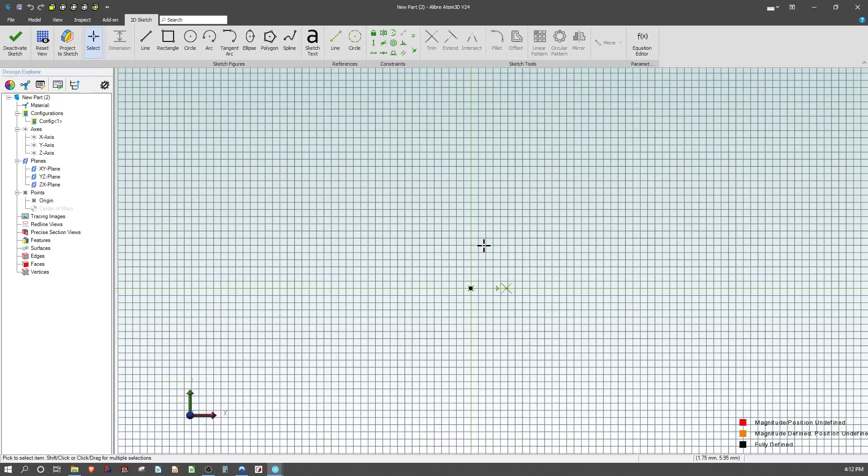Anytime that we start modeling, we want to start with sketches. Let's go into how about the XY plane? I'll just click on my XY plane so that it's highlighted in blue. And I'm going to click on Activate 2D Sketch over here. Now, when we sketch, it is very important and fundamental to Alibre to be able to sketch well. To any parametric CAD modeling platform, you want to be able to have good sketching skills because that's how we make our solid models. Sketching is not the end product of parametric modeling, it's just a means to the end.

So for example, how about I make a rectangle? This is not a very good sketch as it is, right? I just made a random rectangle. But let's look at what we can do with the sketch to turn it into something that's useful to us. So I've made a rectangle, which we'll talk about how to make much better in a few minutes. And when I deactivate my sketch, there's a few tools that I have to make my rectangle into a solid model. The first one is Extrude. I click on the Extrude button, and you can see I get a little preview, and this menu pops up. And I can extrude it, say, 10 millimeters. And when I say OK, our sketch turns into a solid, right?

Now, over here in my tree to the left, I have my sketch in my tree, and I have my extrusion that I've made. And you can see that the sketch is kind of indented under the extrusion as the sketch is part of the extrusion that I've made, right? And so I can go back and change the way that my sketch looks. And as I deactivate my sketch, the part or the solid that I've created updates because I've updated my sketch. So I've got this little history of how I've made things over here on my left. And I can go ahead and delete the extrusion, and you can see my sketch remains.

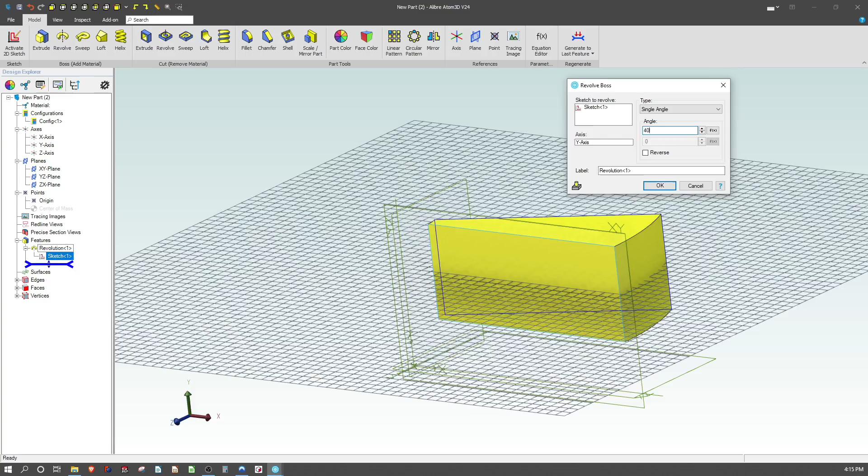I can go 40 or more degrees. So when we work with Alibre, we have these certain tools to change sketches into solids. And that's our goal as we begin to work with sketches, right? There are means to generate solids from.

Now, not only do we have extrude and revolve, which we've seen examples of, but we have sweep, loft, helix, and then we have a bunch of subtractive features and a bunch of ways to edit our solid. So, as we begin turning our sketches into solids, we want to get good at sketches to begin with, because then we can make excellent solids.

So I'm going to delete my elements in my history tree, right? And I'll choose my XY plane once more. And I'm going to choose to activate my 2D sketch. So first off, what tools do we have in the sketching environment? We're going to have

the line tool, right? And I can just keep on clicking to make new lines that are all connected to one another. And I can make a weird shape if I wish. And I can highlight everything and hit the delete key to get rid of what I just sketched. So the idea is with the line tool, we make lines. With the rectangle tool, which we've seen already, we can make different rectangles. With the circle tool, right, I can make circles. This is pretty straightforward.

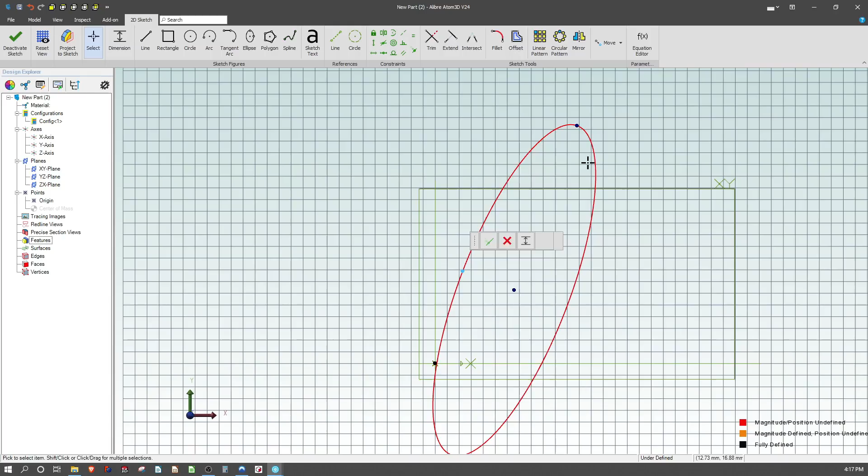Ellipse is pretty cool. I click one point to center my ellipse. I click one point to find the end of my ellipse, and then I click on a third point to choose how eccentric I want my ellipse to be. And from here I have 2 points, a point there and a point up here, and that gives me a nice little method to dimension things with my ellipse.

Next, I have a polygon, and when I select my polygon tool, I can choose either this profile or this profile. You can have the same kind of polygon with both. There are just different ways to define it. Do I want my circle to be on the insides of my lines or on my corners? This might be nice for beginners, so I'll choose this. I'll choose 6 sides, and there I can make a polygon, or what Tim Allen on Home Improvement liked to call a 6-sidagon.

I can make this as small as 3 sides and draw a triangle, and I click apply, right? So we can make different polygons that are really nice. Now you can argue that you can make 6 lines into a polygon, and you'd be right. You could make this without the polygon tool. This is just a way to save time.

Next I have a spline. This can be a little bit intimidating for people, especially people who wish to define their sketches, which we'll get into. But a spline allows us to generate smooth, organic shapes that would be hard to make with the other tools that I've just shown. So those are the main sketching tools that we have to work with.

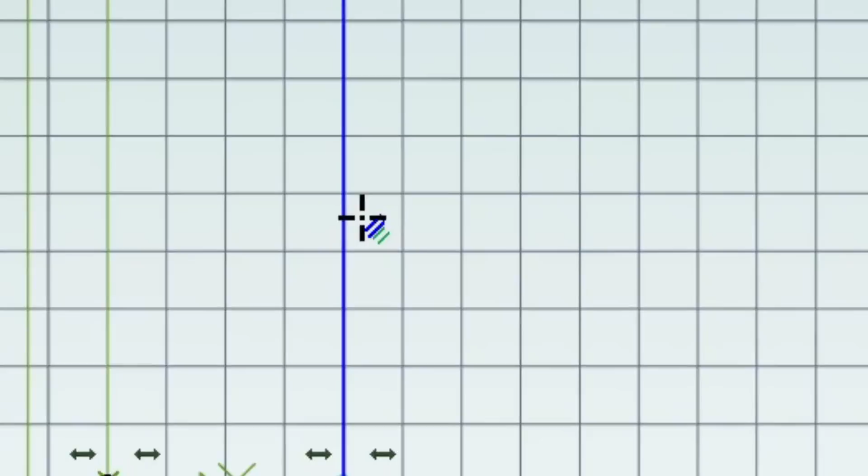So what kind of constraint tools do we have? Well, you can see that there are some of these little gray guys that are showing up already. These are known as auto constraints. So if I draw a line that is vertical, you can see that I have this blue auto constraint that shows up. And I have a blue auto constraint on this other line over here.

That's no accident. That means that should I click to create the line, it will automatically be held parallel to the other line that has the blue symbol showing up to it. So that is known as the parallel auto constraint.

Now if I move this line horizontal, I have this little right angle looking square thing. That is the perpendicular constraint, right? So perpendicular means that it will be held at 90 degrees to that line all the time. Likewise, if I move it at this angle, you can see that Alibre knows that the parallel constraint shows up if I move it parallel to a line that already exists in the sketch.

So if I define this line and hit the Escape key to exit my line tool, now however I manipulate the sketch, it will keep these lines parallel. Very, very handy. So sometimes you have these constraints that show up automatically to help us save some time and effort when we go to sketch. So I have auto constraints, and we've covered what parallel looks like.

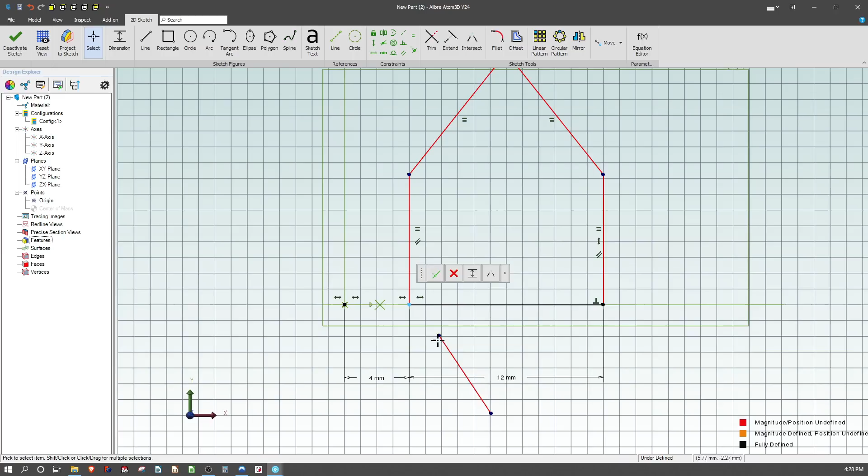That's coincident. Likewise, let's say that I've drawn a line and I want to fix this endpoint onto this endpoint. I can choose coincident and choose here and here, right? And now, no matter how I manipulate my sketch, I will always have these lines be coincident.

The key thing is I always hit the escape key after using my constraints. So I make a line, right? I add a constraint of some kind, and then I hit the escape key to get out of that tool. Otherwise, Alibre will think I'm still wanting to continue to add constraints using that same tool. All right.

So how about we fully define this? I get into my dimension, right? I choose my dimension tool. I'll add a vertical dimension to give my wall a height of, say, how about 10 millimeters? What if I want to choose an angle on my roof, right? What if I want my roof to be like 45 degrees?

Well, if I click one line and another line with my dimension tool, I can choose a degree angle of, say, 45 degrees. And now if you notice, my whole sketch is black. That's our goal, to fully define every part of our sketch. It should be black. So we're all done when the sketch is black.

Now, I've shown how to do an angle with a dimension, and I've shown how to work with the lines. But what if I get a little bit more complicated, right? What if I delete both of my lines, what if I want to have a smooth curve that goes along the top of my roof?

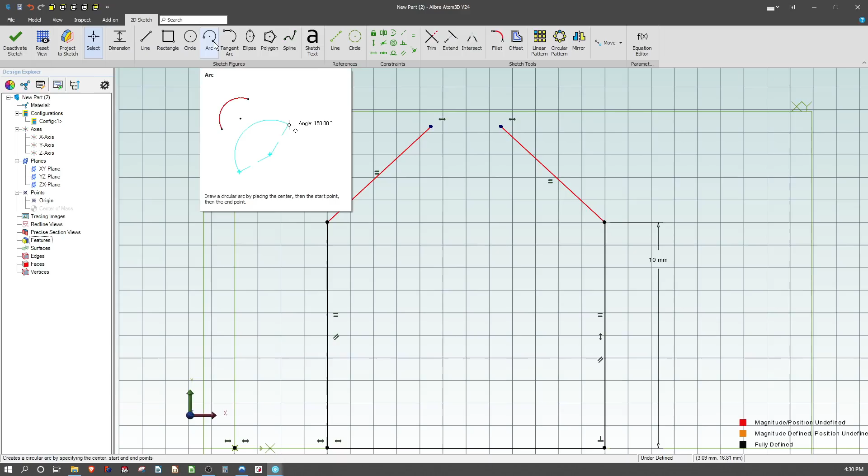Now I've shown how to make a 3-point arc. Right? I choose a center for my arc, and I choose some lines, right? And I can just sketch an arc out that way, as you've seen. But maybe this is a good time to show the tangent arc, right? So I choose my tangent arc, select a point, and then I choose the second point. Now you'll see as I manipulate my arc that I remain what's known as tangent.

Tangent is a nice feature because if I draw an arc like this, you can see that there's an abrupt transition between my line and my arc. So if I hold Shift and I select both my line and my arc, I can change that to be a smooth transition by choosing tangent constraint. I choose a tangent constraint, and then Alibre makes sure that my arc smoothly transitions into my line without any sharp edges. Likewise, I can choose coincident to fix the end of my arc onto my line.

And I think by the way that my geometry is worked out, I don't need to worry about adding a tangent on this side. In fact, if I try to add a tangent on this side, I get what's known as a constraint cannot be applied since it results in an over-constrained or inconsistent sketch. If you come across this error, it means that you have more than one thing telling the sketch how to be.

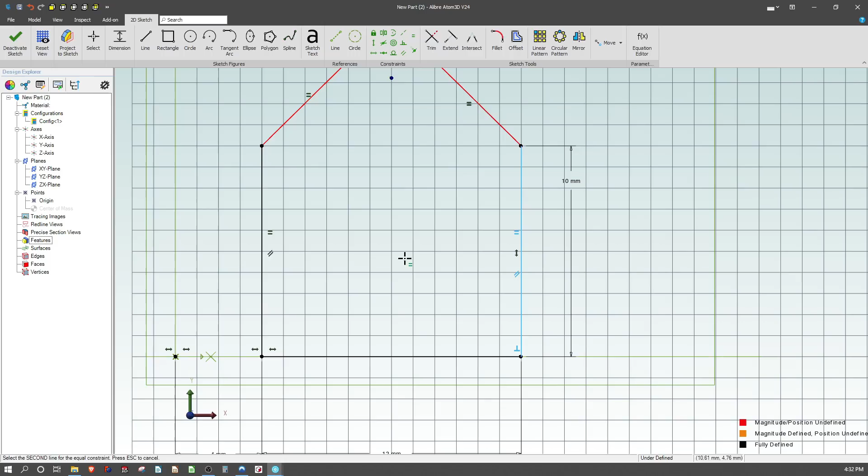So in other words, if I try to say that this line right here is 10 millimeters and this line right down here is 12 millimeters, and I go into my equal tool and I tell my lines to be equal, then it says, oh, it's over-constrained, meaning this has to be 12 and this has to be 10, which means that they cannot be equal to each other, right? I have multiple settings that are conflicting with one another.

So as we go about in Sketch, it's important to remember that we want to do so in a way that it doesn't over-constrain anything. We give one definition to everything. And if that's overwhelming, just think that that will automatically pop up if you try to over-constrain. So it's not something you have to worry about.

Okay, so we've done this. Now let's say I want to add in a circle for some reason. There are some constraint tools that I would like to cover that cover how to work with circles. One of my favorites is concentric. So concentric means that two circular things will share the same center.

Here I've got a little dot that shows the center of my circle, and here I've got a little point that shows the center of my arc. And if I choose concentric on both of these, it forces them to share the same center, which really is actually kind of cool. Maybe I'll leave my circle there.

Next one, this is a coradial constraint, which is a lot like concentric. So if I draw an arc, right, coradial just means that these arcs will share the same radius if I apply that tool. So I'll choose coradial up here. And now that means that they share the same center, like concentric, and the same radius. Also, just by hovering over this, you have a pretty good explanation.

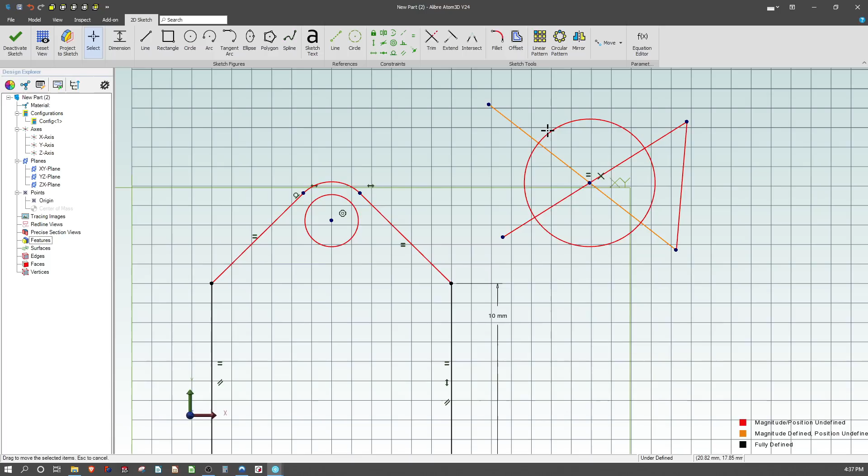Well, I choose my intersection constraint, highlight the center of my circle, and highlight where the two lines intersect. There we go. And now my circle is held at the intersection of these lines. And as I manipulate these lines, you can see the circle stays intersecting. So that is the intersection constraint. It's not used as often by me.

So we've got perpendicular, parallel, I think we've covered equal, basically all of them. Symmetric is a little bit more advanced, but it can be a lot of fun. Let's say that I have a circle and another circle, and I want them to be symmetric about this line. I'll choose the symmetric constraint, and I'll choose the line of symmetry, here this line, and I can choose one circle and another circle,

and then I'll hit the escape key, and I've made it so that these circles, no matter how I manipulate them, are symmetric about that line. So that's really handy if you want things to be symmetric and constrained in a way that they're predictable about a certain line.

I think that is, midpoint constraint, right? So let's say that I have this line and I want this point to line up right at the dead middle of this other line. Well, I can choose the midpoint constraint and choose my line and choose my point, and it automatically knows that this line should be in the dead center of this other line. So no matter how I manipulate it, it will always end up as being dead center. So those are all of the constraints and relations that we've gone through, all of them that are available.

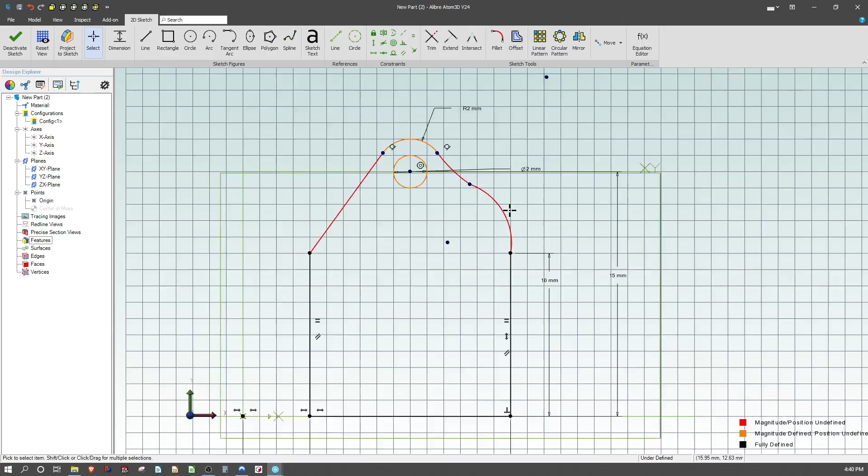So if I want these to be tangent, I could have just drawn a tangent arc, but if I have two arcs that are not tangent, I can use this tangent tool to make them tangent to each other. Likewise, I can make this arc tangent to the line. And now I've got a kind of a wavy roof that has smooth transitions all throughout.

Likewise, maybe I can delete this and do the same thing over here. Tangent arc and a tangent arc. Now I want my roof to be symmetric, and there's a lot of ways to make it symmetric. So with CAD, it's less about what is a way that I can do it, but it's really choosing the right way to do it. And because you're the engineer, you get to decide based on your design intent what the right way is.

So I can make this symmetric in many ways, but for the purposes of this demonstration, so I can introduce some new tools, let's talk about these dotted lines and circles, right? If I choose this dotted line, and I come over here, and you can see as I highlight this, there's a little dot that shows up in the middle of my line that highlights the exact center. So if I click on that little midpoint, then I know that I have the exact center of my line. Well, now I can make this vertical, right? I can make this dotted line vertical, and that forces the circle to be in the exact center of my house.

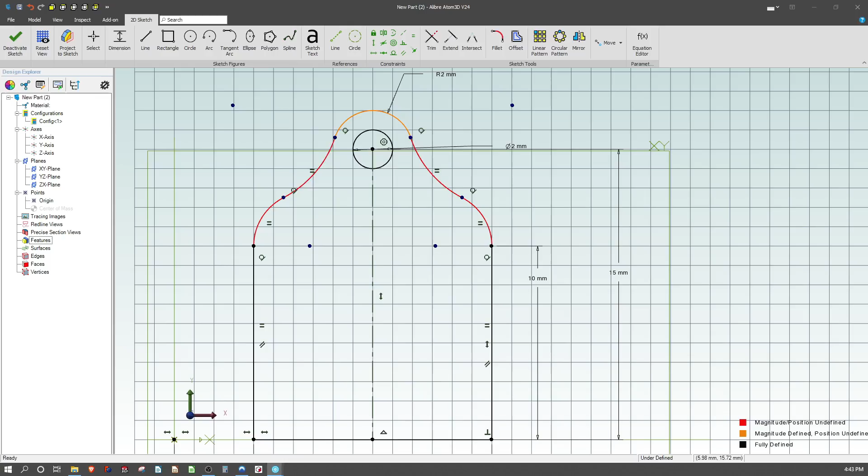Likewise, I can click and drag again. I can say, oh, you know what? I don't have a full radius on these lines, so I can choose my dimension tool, click on my arc, and I can set a radius of, say, 6 millimeters. And what if I want these to have a radius of 6 millimeters down here? Well, then I can choose equal and give them both a radius of 6 millimeters, and that fully defines my sketch. Everything is black.

So a nice troubleshooting tool is to say, I can click and drag things, and in the ways that they are free to drag, I can use dimensions and constraints to stop them from being free to drag, right? So let's deactivate the sketch now. I just click deactivate sketch, and I can extrude this, and just as before, it extrudes my shape. And because I have my hole, I know that it's going to not extrude where I drew my hole.

Likewise, I can get back into my sketch by right-clicking it in the tree and saying Edit. And I can add anything else, right? I can add a little ellipse into this shape. But I'll move this ellipse down a little bit so that I don't interfere with my hole. If I deactivate my sketch, there's my ellipse. Now, of course, my problem with doing that is I just drew an ellipse without defining it. It is best practice to make sure that my ellipse is black.

So I can add, say, a dimension here on that little handle it gives me. I can add a dimension here on the handle it gives me. And now I'm fully defined. We'll deactivate. And there's my house shape, which I think is pretty cool. So that is how to sketch.

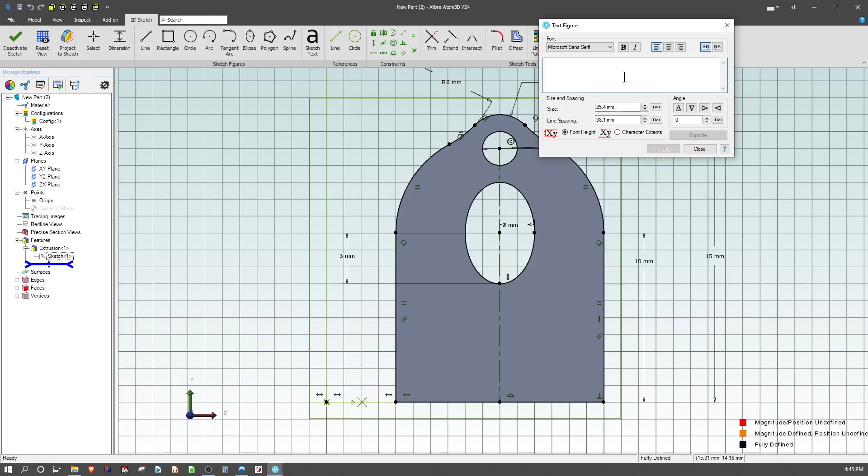So we've covered using the dimension, the line, the rectangle, the circle, the arc, the tangent arc, the ellipse, the polygon, a little bit of the spline. We can also add text to our sketch, right? If I type out HOUSE here in all caps, you can see that my text is quite large. So I can highlight my text and make it something like 10 millimeters, a little bit more manageable, but it should be smaller still.

So if I accidentally hit escape, as I've just done on purpose here, I can always double click on my text and it brings up my editor again. Maybe I want to make this 1 millimeter, right? And then I can position my text with my little center handle, and I can define it how I want to. Let's choose coincident up here. And I can choose my little handle. And it tells me that I've already made the coincident constraint, so that's good.

What if I try to dimension something from end to end? That will tell me that I'm already dimensioned, so I can only select a dimension that will have parentheses around it. What does that mean? That means that it is a measurement that is not telling the sketch what position it has to be in, but rather telling me what the measurement is without defining anything. In other words, if this didn't have parentheses, it would be trying to tell the sketch that it needs to be 4.584 millimeters wide, but we already have other settings that determine how wide the sketch is. So it is what's called a driven dimension.

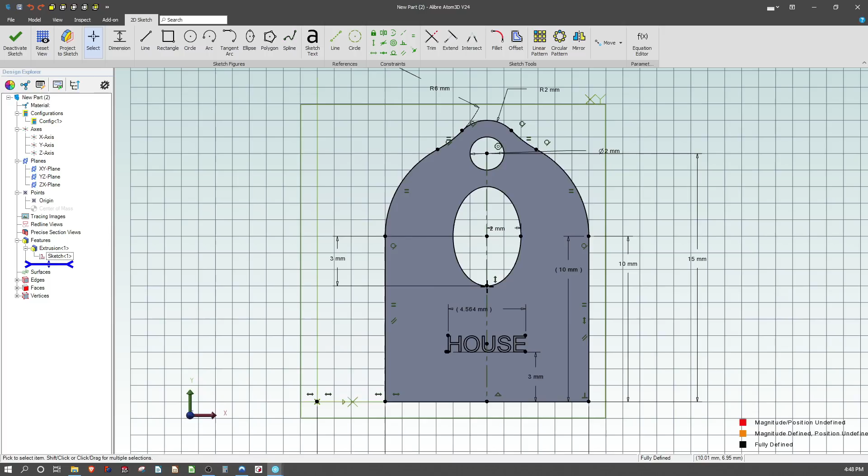It takes a lot of practice to be able to sketch well. So please don't be discouraged if it takes a little bit of work to figure a sketch out. So as I deactivate the sketch, you may be asking yourself, how come I'm not having the house figure show up? It's because I have text within a closed figure. I did this on purpose to show, in case you run into this too. Having text within a closed figure can be complicated. So if it doesn't work, we're just going to take our text out, and we can add the text in a secondary operation.

We're sketching on the XY plane. What if I chose my XY plane and chose Activate Sketch again? Now, let me take my text. I'm going to say HOUSE. Maybe we can make this 5 millimeters. We'll say apply, and then I'll double click on my text. Okay, like 5. That's still big, isn't it? 1 millimeter. Okay.

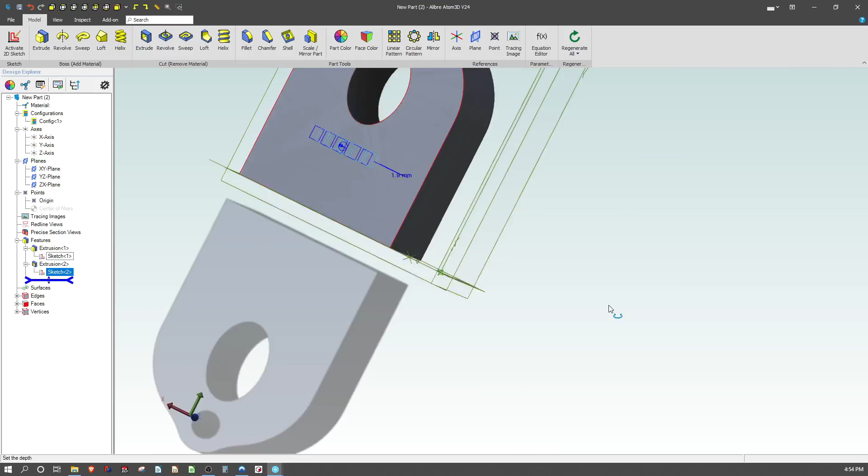So take my house text, and I should fully constrain it. I'm just going to give it a few random dimensions of like 10, and then give this a vertical dimension of, say, 5. And I deactivate my sketch. Now I still have my text. It's not showing up for graphics reasons, but I can cut my text by choosing this extrude. Not this extrude over here, but this extrude that's made to remove material.

And I can move my text into a depth by dragging this arrow, or likewise in the menu that pops up over here, I can specify something like 2 millimeters. And then I've got a 2 millimeter deep house, what we think of as a pocket or an extruded cut. So this extrude adds material. This extrude over here takes material away. And you'll see that theme through a lot of these tools.

So if I try to say I want to cut through all, I certainly can do it. And CAD is very forgiving. But you'll notice I've got this little body that's floating in the middle here that's not connected to anything, right? So if I take my view and I look at it straight on, this little O center is just floating in space. So it might look right, but a few considerations to think about with CAD and how realistic you actually want it to be.

So I've got my house over here. Things are looking good. How about I save this part off as like a little sample part, and I can put it into GrabCAD. So if we want to save something, we say File, and we can say Save or Save As. I can always take this window down, even close it after I save, and we'll create a new part.

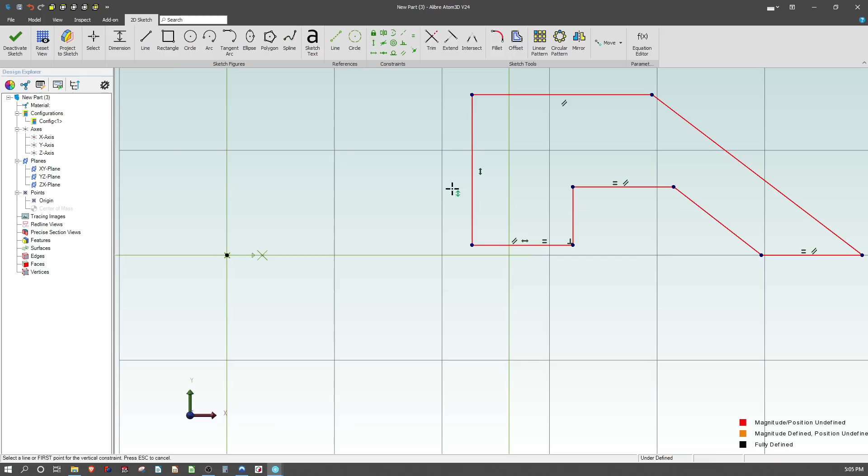Now, how else do we want to constrain this? Let's say we'll go with a horizontal from this point to this point. And then let's give it a horizontal from the origin over to this point, right? And maybe I'll give this a dimension. Whoops. A dimension of, oh, this one is in inches, of course, because I think that's what I'm defaulting to. 1.5 inches, how about? Give this a dimension of 1 inch.

I think I'd probably want these lines to be parallel. So I choose my parallel tool and click both of these lines. And then I'll choose equal, and maybe I'll make these two lines equal at 1 inch. But the constraint already exists, of course. All right, maybe I can add an equal from here to here. You know what? I don't like that. Control Z, the easiest way to get rid of equal. Let's come over here and maybe make this 0.5, right? Something smaller. Maybe I'll give this an angle of like 45 degrees.

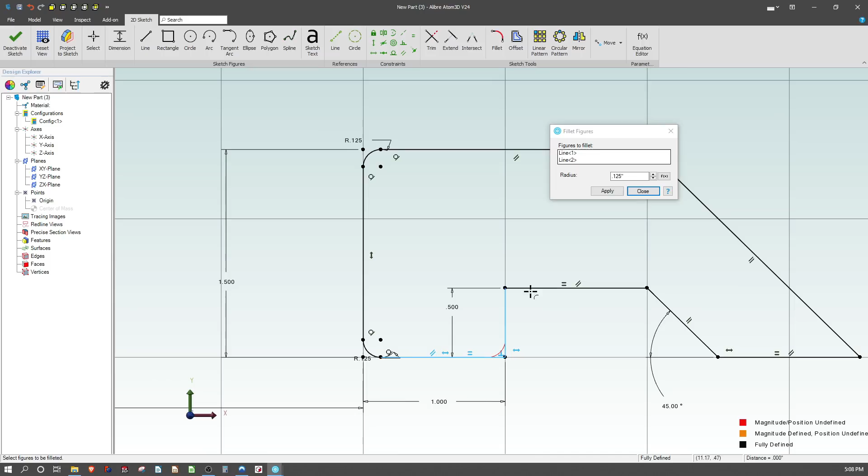That's a nice feature so that I don't have to worry about adding a fillet after the fact. I can choose this line, and I get another nice little fillet, right? So I can make every edge, if I wish, have this fillet and do so way more quickly than trying to sketch out all the different little arcs that I have to sketch out.

Now you'll notice on that last one, I did the fillet, and all of a sudden I've got red and oranges, and I can click and drag and verify that, yeah, something happened. So I'm going to hit Control Z, and usually what happens is when I add in my fillet, and that happens, I lose some kind of constraint or relation, and usually something related to the fillet that I've added. And if that happens, that's okay because I can reconstrain.

The question is, what did I lose and why? I go from here to here, and I add my fillet. Yeah, there's some kind of dimension that I'm losing. I think it's probably an equal somewhere. Regardless, I can use a dimension or another constraint and simply reconstrain everything.

3.5 is what it was. Looks like a great dimension. So that is the basics of using the fillet command. And there again, so that happens sometimes. And I think that happens in most, if not all, platforms.

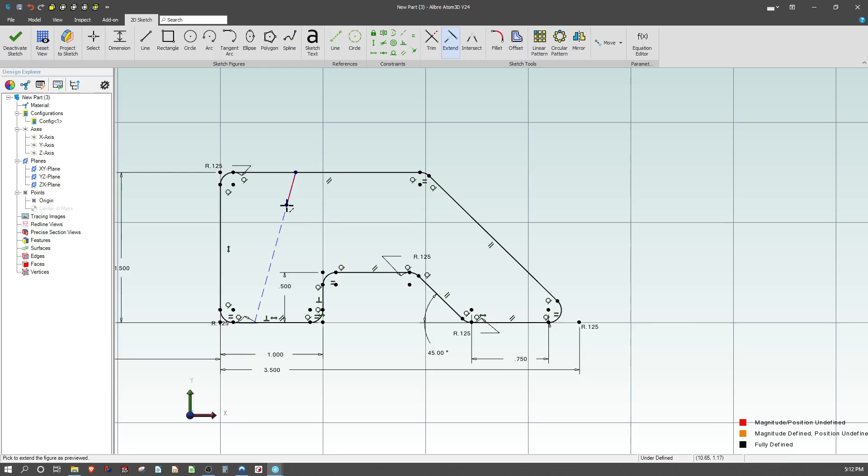All right, excellent. Finally, extend is kind of the same thing. It's kind of an easy add, almost coincident-like thing. If I choose extend and I choose my little point, I can choose a point that I want it to extend to. And these things automatically extend to the next points. And again, they're held coincident, right? So a nice little time saver right there.

Finally, you can do that with 2 lines if you wish, right? These are just little time savers. You can do the same thing with these constraints if you wish, but we can just choose 2 lines and have them intersect together and be held coincident at their endpoints. So those are some additional tools now that we've had a little bit more practice with sketching.

Okay, let's do a revolve to finish up our mechanical ring. We'll deactivate our sketch and we'll choose the revolve command. We'll select our axis. I can choose it from the graphics display here. And there's the preview for my ring. I will say OK to make it so. So that will be our revolve now.

Now that I have this ring, let's go over a few other things that are going to be just useful. I'm going to go into my tree, find my sketch. I'm going to right click and edit my sketch. Maybe I want to offset my sketch. As I edit my sketch, I'll choose offset. And I can offset all of these points. Now I'm going to go kind of thin. Let's go with 0.05 or something like that.

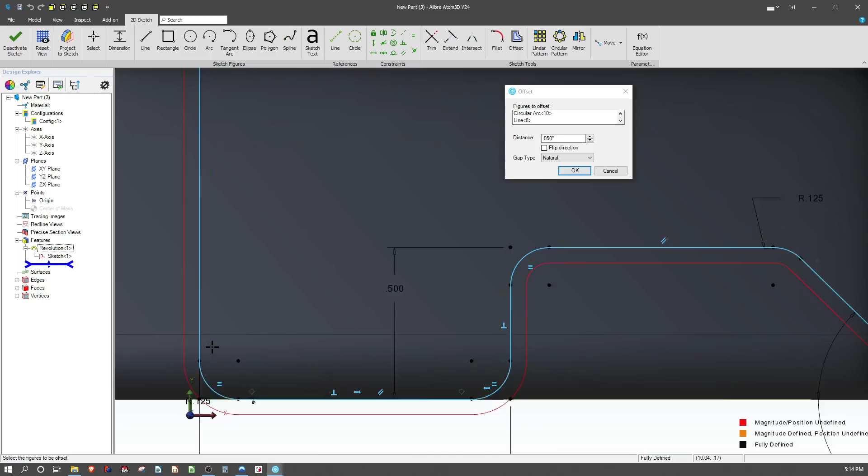And then I'll continue to select these parts. And I don't have to go all the way around if I don't want to, right? But offset lets me simply choose sketch entities that are a specified distance away from what you've already sketched. So I can make this 0.05, or I can continue to offset higher and higher.

Now as you offset, you'll see that my fillets right here, they get so big that they have to collapse into nothing. So good on Alibre for being able to deal with those fillets effectively, right? But here I have an offset that I still have to add my constraints and relations to, right? They're not constrained in any way. But I can offset this if I wish, which is a great tool to have.

Likewise, I just clicked them one by one to show you how it goes, but I can highlight all this and choose my offset. 0.05 was actually pretty good. You can see that we've been able to offset it pretty well. So let me fully constrain this.

And if you haven't had a chance already, I'm going to fast forward this to not waste time, because it really is going to take a long time to do this as far as just viewing this is concerned. Try fully constraining this yourself. And then I'll see you after I'm done fast forwarding.

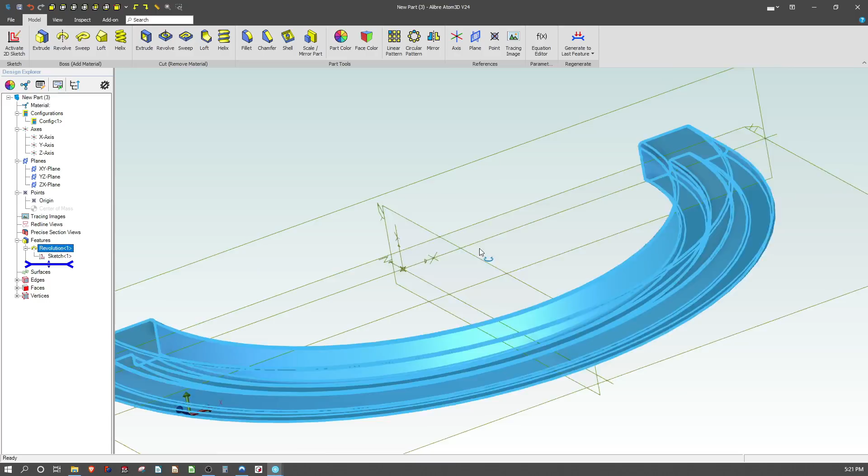So when I go to update this, right, I deactivate my sketch, and my solid updates to match what the sketch was, and you guessed it, we should have a hollow part. So if I edit my revolution and make it go 180 degrees instead of 360 degrees, right, we should be looking at something that is hollow, which should be kind of handy if you want to make something like that. I think that'd be hard to make in real life, but hey, that's pretty cool.

So those are some sketching exercises where we can use the offset and some of the other fillet type commands in the sketch to speed things up and make it easier. So we've covered extrude and revolve. And then we've got sweep, loft, and helix. And all those are pretty intense, especially the loft, which gives us a lot of functionality to be able to work with. So let's save this.

And then let's work on modeling the next thing. Let's make a sweep. So I'm going to close this down. Let's create a new part. This will be the new part context here. What is a sweep? Because so far we've covered an extrude, which pushes something out of a plane, as you've seen, right? If I want to extrude a hexagon,

I take my polygon figure, I could take my horizontal, I could take my dimension and make it like, I don't know, an inch. Deactivate the sketch, and as I extrude it, you can see it's just being pushed with that profile straight out of the plane. And when I revolve something, I can just revolve that profile straight around an axis.

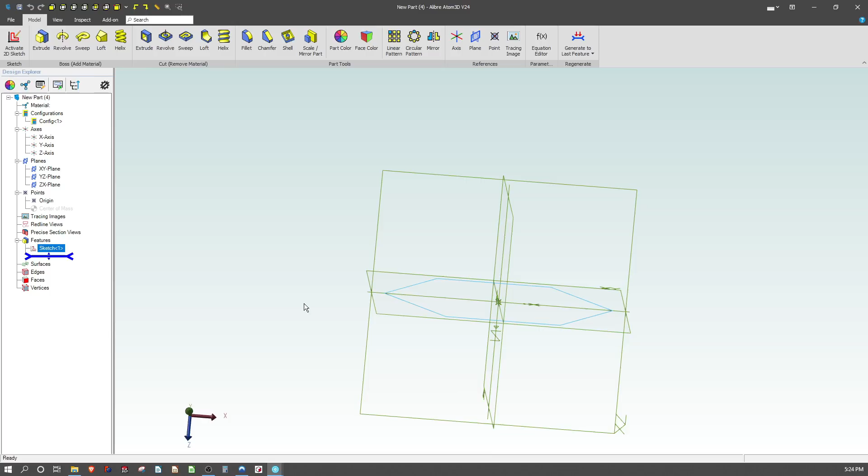So what is sweep? Well, how about I keep this little polygon or hexagon figure? If you needed me to slow down when I made that, all I did was make this top line horizontal, and then I gave this a dimension of 1 inch. I'll take my ZX plane now, and I'll activate a sketch on my ZX plane. It is important to select the correct plane on both sketches.

So I make a line, and maybe I'll make a tangent arc. I really like tangent arcs because they save me a lot of time. And you don't have to make the sketch that I'm making, you can just do your own thing. We can make whatever path we want, and I'll choose the tangent and make sure that I am tangent at all of my transitions here.

Alright, yeah, looks like we're tangent there. And tangent there. No, looks like we're not tangent, so I'll add a tangent. There we are. And then let's start giving this dimensions, right? Let's make this, say, 4 inches. We'll give this a radius of, say, 2 inches. We'll give this arc a vertical dimension on its endpoints, let's say 0.5.

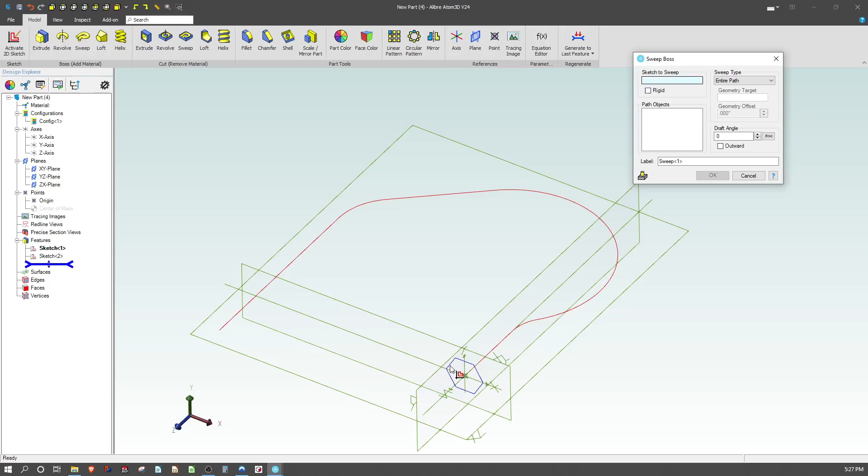And you think, what would I be doing with this hexagon profile and this big path that I've made? Well, we're going to choose this sweep button. And on this menu that comes up, it asks us for a sketch to sweep. I'll choose my hexagon profile to sweep. And on my path, I'll choose this path. And as you can see, it fills in the path with the profile that I've made.

So we can sweep entire path, and I'm going to stick with entire path because I don't have any geometry to sweep to. And I'm going to say OK on that. And I've made a nice little sweep with my model. So that's how you would make hood pins on a muscle car, or all kinds of different things. Sweep is an extremely useful tool. And it all starts with just one profile sketch and one path sketch, right? Easy. So that is how we do sweep.

Next, why don't we take a look at Loft? Loft is a highly developed feature that Alibre has. It is incredible. Alibre has done such a good job with lofting. I love using it and I'm very impressed by it. So, in order to do Loft, we have to go through our reference geometry a little bit.

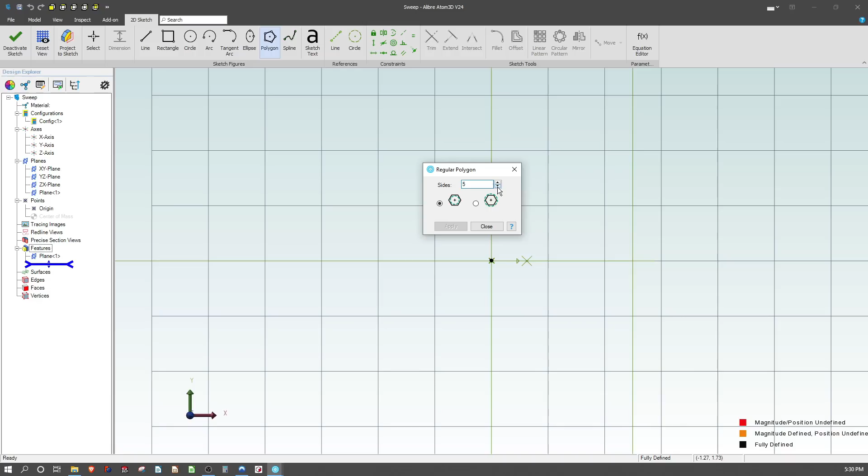And let's choose a polygon, or as Tim Allen calls it, a 6-sideagon, but let's make it instead a 3-sideagon. And I'll make my triangle. I think that looks like Harry Potter and the Deathly Hallows or something like that. And I'll choose a horizontal constraint and make my line horizontal. And I'll choose a dimension, and I'll make this something like 10 inches. Deactivate that. So I've got a triangle sketch on my one plane.

Let's choose my XY plane and sketch on my XY plane. We'll choose a circle, and maybe I'll make it about that big. 6 inches, right? Good size for a circle. We'll deactivate that. So I have a circle and a triangle. I've got my circle, and I want it to go to where the triangle is. And as it goes to the triangle, I want it to gradually turn into a triangle from being a circle. And that's what a loft is, right?

So I click on my loft, and this menu comes up, and I choose my circle, and you can see my sketch comes up here, and I choose my triangle, and there I have a circle that slowly transforms into a triangle. It's brilliant. I say OK, and there's my loft. Now, I didn't do it exactly the way that is best to do when I loft. I broke a rule.

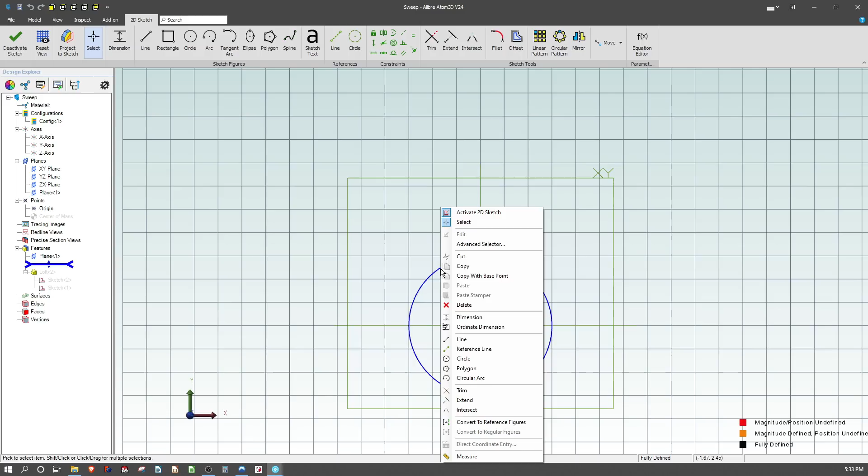So I want the circle to be 3 elements instead of 1 element, but that doesn't mean that I draw 3 circles. That doesn't make any sense, right? So what I can do is right-click on the circle and convert to a reference figure. And if you recall, the dotted lines mean that this is not actually defining the geometry of the model, it's just there for reference. So if I deactivate my sketch, I don't have a loft anymore because I got rid of my circle, and I get this little error message on my loft. See that little X by my cursor?

And if I check my status, it's going to say invalid parameter was passed to the function. That just means that my circle has a problem. So let's go back into my sketch by editing it. But I still have my reference circle. And so I can take my arc, and look at that. I can make 3 arcs over my reference circle. And that should be excellent, right?

I'll take my horizontal, and I'll make these points horizontal. I'll take a vertical, and I'll make this point vertical. Now, for really good form, I want the angle from these points to all be 120 degrees apart. That means that every arc goes 1/3 of the way around. Well, to do that, I can use my reference line. So I choose my reference dotted line up here, and I draw from here to here.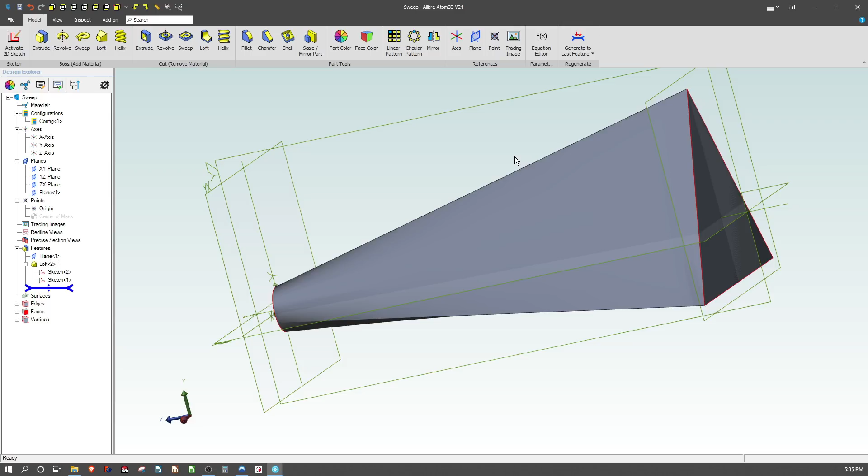So if I edit my loft, my triangle, of course, is sketch number 1. So I specify tangent to sketch number 1, and perhaps you didn't see any changes. It looks much the same so far. Well, let me add a magnitude, right? So I choose my tangent magnitude. Let's make it like 3. And you can kind of see now that my profile changed. And maybe I can up it to something like 10. And as you can see, it makes it more triangular.

So now, especially if I take a side view, which I have some view icons up here, I can view the side. And I'm normal to my plane as I go into it. That's what that setting does.

And I can do the same thing if I edit my loft again by specifying a tangent magnitude on my circle. And maybe I'll make my tangent magnitude 3. You can see that I can change this profile. I can make them both 10. And I can change the way that my profile looks. All right, that's actually really cool. I really like that. So that is one of the most important options for me when it comes to lofting, because it makes life so easy to be able to go do this change.

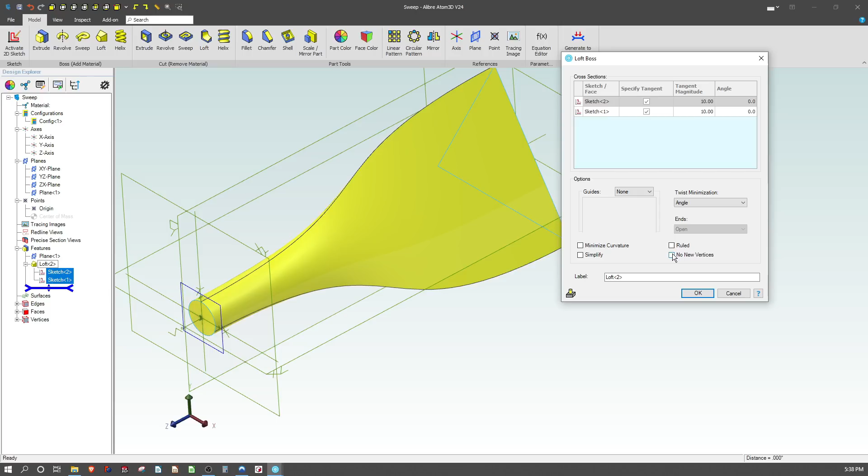You can choose ruled, which is again just that straight line profile. And I can choose something that produces no new vertices, which again, because we have gone from the same number of elements to the same number of elements, really takes all that uncertainty out of the equation. But that's also a way to troubleshoot if you don't have the same number of elements for some reason. No new vertices. So we can say okay to that.

But are we done lofting? No, we still have more things that we can do with lofting. Why? Because Alibre has made lofting very, very powerful. So, what else can I do? Maybe I'll get rid of my loft for now. And I can select this plane, and I can activate a sketch. And I can choose an arc. And I want the center point of my arc to be horizontal to its endpoint here.

And then I want to be able to reference, say, this line here, but as you can see, I can take an arc and I can reference anything along this arc, but I can't reference my sketch. So what I can do is import a part of my sketch into something that I can reference. I want to reference this because the end of this line is the exact center of my triangle, and I want to reference the center of my triangle.

So I'll project a sketch here, and this menu comes up. So I can choose to either create a sketch figure or create a reference figure. I want this to be reference. And I'll choose an entity to project. I'll choose my line. And then do I want it to maintain association or not? I almost always want it to maintain association. So if you ever forget what this does, just choose maintain association, and I'll show you here. So there is my reference line with maintained association.

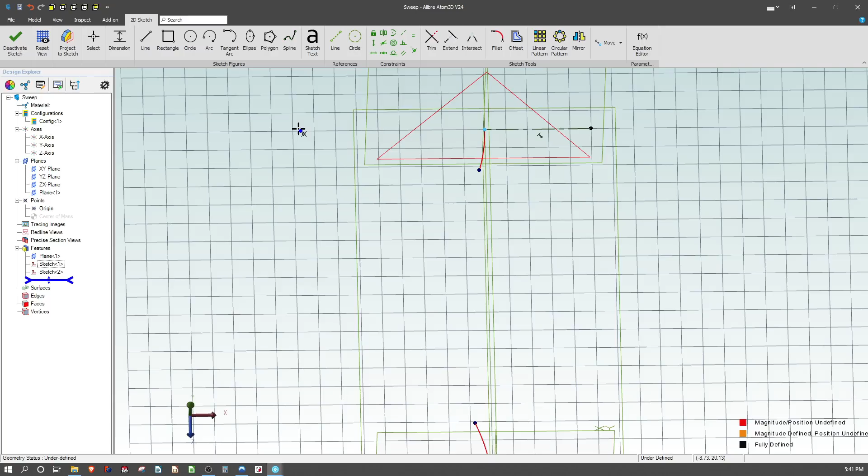Now that I have the sketch element projected, I've got this point that marks the center of my triangle, and that's what I want. I'll make another arc, and I'll also choose horizontal. I'll choose equal so that these arcs are of equal radius. I'll choose a tangent arc. Looks like that tangent arc doesn't want to go actually, and that's fine because this arc will work just as well. So I'll put in a 3-point arc, and we'll choose tangent. Tangent, and everything else is tangent.

All right. I'll choose a vertical, right? I want these points to be vertical. Apparently that's already applied as well. And so as I manipulate this, it looks like I just need some radius values. I'll go dimension, and I'll choose this radius value here. 20 is fine. Choose a radius value here, maybe 15, right? So now I've got this little swoopy line. We'll deactivate our sketch.

So now what if I say that I want this circle to slowly turn into a triangle, but instead of just going in a straight line, what if I want it to follow a path? Well, I'll choose my loft, I'll choose my circle, I'll choose my triangle, and then notice I can't see my other sketch anymore. I'll choose guides, and I'm going to choose for right now a global guide. We'll go through these. And I'll choose not my global rather, but my center line.

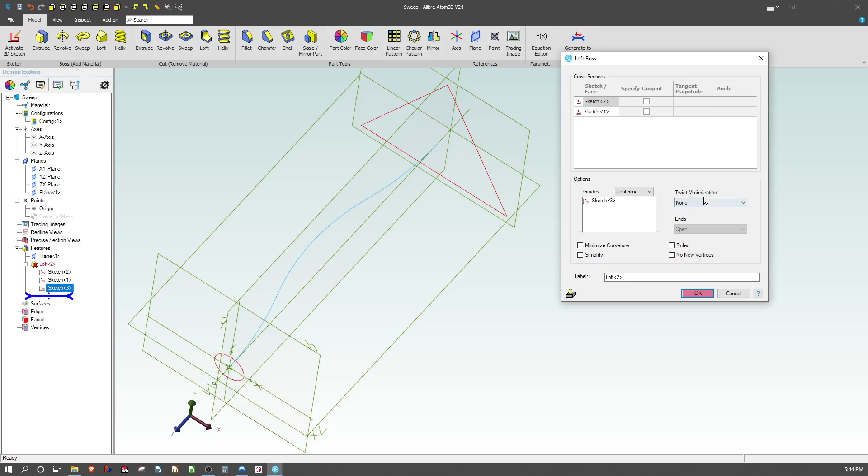If I choose ruled, it gets rid of my guide, so we'll not choose ruled. And no new vertices again. That's not too much of an issue because we've done it right in using the same number of sketch elements. We can minimize twist in various kinds of ways, but again, I always leave it on how it is unless I'm having some weird problem with twist, which pretty much never happens anymore.

So there is our cool triangular loft. I'd say that that is pretty awesome. Let's save this.

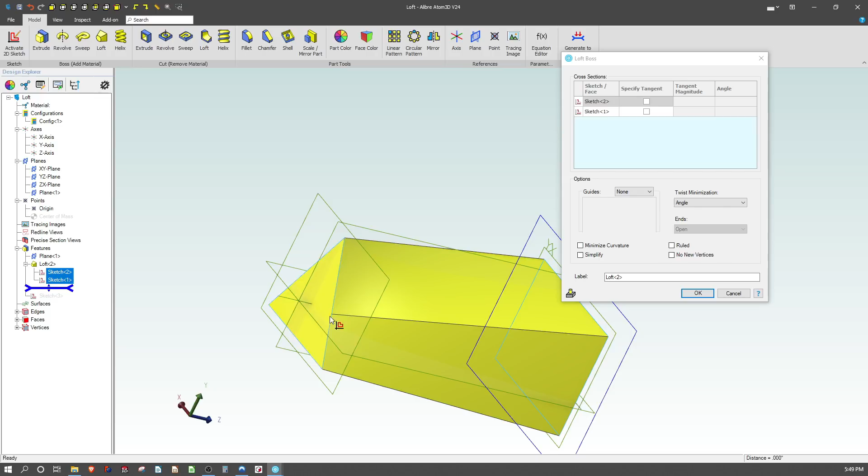right? That's one of the things that we're talking about as to why you want to have the same number of elements, because we don't have that much control over where the seam ends up. If I had 2 lines right here, I could change the length of both the lines and sort of control where this little extra seam ends up. You know, add something like 10 over here. We can get a really interesting shape.

But again, I might want to have more control than something like this. So what can I do to control this? And what can I do to control this seam? Let's say, I mean, you'd really want to use the same number of elements, but let's make a case here where maybe I have to go to 3 elements. What are my options? Well, first off, I have the ability to make planes, and that is extremely useful.

So I'm going to delete my loft here. And I don't need my center line anymore because we've used that, been there, done that. Let's make a plane that intersects with this sketch. Now, first off, let's go to my triangle and edit that sketch. And this is a good example of when we want to use a driven dimension, right?

I can take this and dimension over here, and I can see that I'm vertically 5.773503. So I can choose my plane up here, and I can make a plane that same distance, 5.773503, I think it is. Okay. So close that. And yep, our plane intersects the triangle right there.

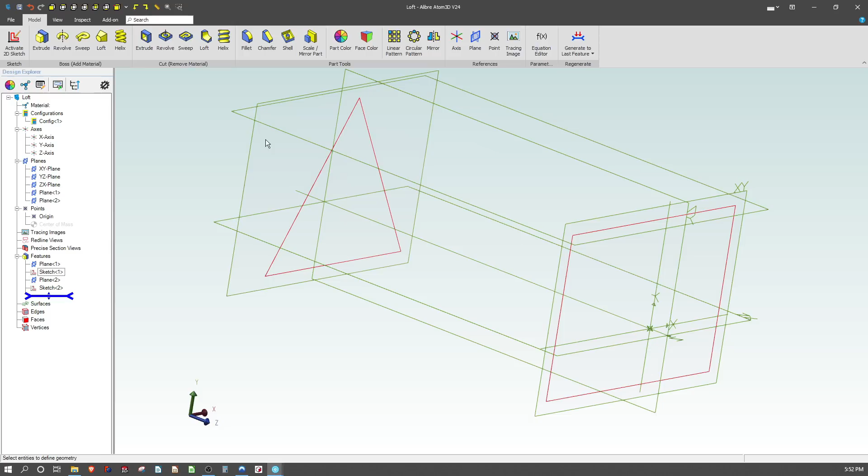I can take my plane, I can create a sketch, and I can import some sketch elements again. All right, first off, I want to import this, which marks the center of my triangle with maintained association. And notice I forgot to make it reference. I wanted to make it reference, so I'll right click and convert to reference. Next, I can actually do the same.

Import this guy with maintained association, and again, got to make a reference. Okay. So let's say that I want to choose an arc, and I start drawing it from way over here to here, right? And I'll choose coincident, and I'll select my little reference and my arc center, and I'm fully defined. So I'll deactivate that sketch.

Let's do a loft from here to here. And this time, I want to choose a guide. And I choose a guide. Let's choose global. And I'm going to choose this line as my global guide. And as you can see, it changes the way that my edges interact. Now my seam is on this side because a global guide makes the seam go to the top of the triangle, right? My seam is completely following that global guide. So Alibre compensates and chooses to put the seam over here.

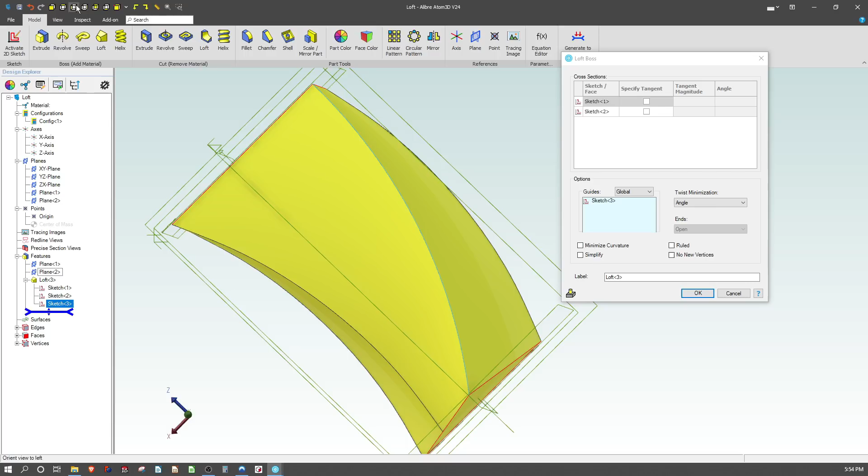Now if I choose local, it might look the exact same, but not quite. You can see that my profile shifts around a little bit. A global guide is to say that the entire profile is going to be bent like this. If I choose my top view up here, my entire profile is following an arc shape. But if I choose local, then we're saying that only this seam is following this arc shape and everything else is acting the same. So there's a difference between global and local.

Is this guide curve that I just sketched out acting on the local part or on the entire part? It's your choice between global and local. Tangent, you can see it changes it still. And I explain tangent a little bit more in my lofting video. And finally, center line doesn't apply because you need to have it go from center to center. So I like local myself. I'm going to say OK.

But we still have this problem where we have a seam going through the middle. And we set out to solve that problem, and we haven't, right? So I'm going to delete my loft. Let's solve that problem now. I'm going to sketch on the same plane that we were sketching on before. And maybe I'll choose a spline just to be a little bit fancy. But actually, before I do, let's project a sketch. And let's project our line here and our line here. We'll make them as a reference with maintained association, as we've talked about.

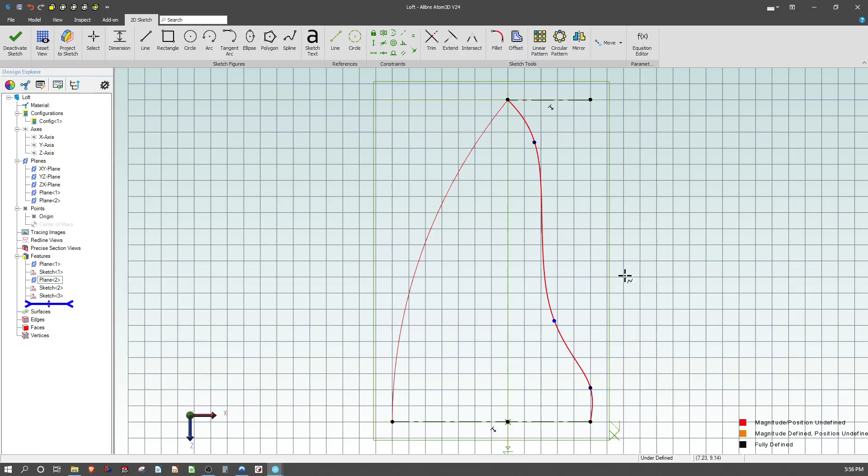And let's go to the top, and I'm going to make my spline. Right, we're just going to be real fancy and come up with kind of a fun spline path, except I did attach my spline to the wrong side, so let's do that again. Here to here to here to here, and I'll move my spline to the middle, right? So I've got this sort of crazy, wacky geometry. Ooh, that'd be fun. So I'm going to deactivate my sketch. Now I've got two guide curves.

Let's go to loft. We'll go from our square to our triangle. I'll choose my guides as local, and we'll go from here. And then I choose a second local guide to here. And now you can see we basically are going from 4 to 3 faces in a very graceful way. We don't have a seam that's going straight to the middle of one of these lines, right? All of our seams are pretty well controlled. Now I can make these global if I wish. And you can see what global looks like. One side follows one side and the other side follows the other side globally.

So likewise, I can make a plane down here and make my own guide curves and kind of control every seam going to every other seam. Very, very powerful what Alibre has done. Obviously, since I'm using guide curves, I can't really minimize any curvature. I probably can't simplify, but you can see we've done pretty well with some of this lofting. So when I go to loft, hopefully you can see the very intense implications of usefulness.

So if I pull up my airplane, this is a lofted body. These wings are lofted. This canopy is lofted. If I go through the history of how this is made, I haven't shown you how to do this bar yet, but I move this bar to the top, and I can kind of rewind how I designed this. I go to this loft, I go to my view tab, and I show my sketches, right? This whole body is just going from one sketch to another sketch to another sketch. And I just do one big loft between all these sketches to generate the body of this airplane.

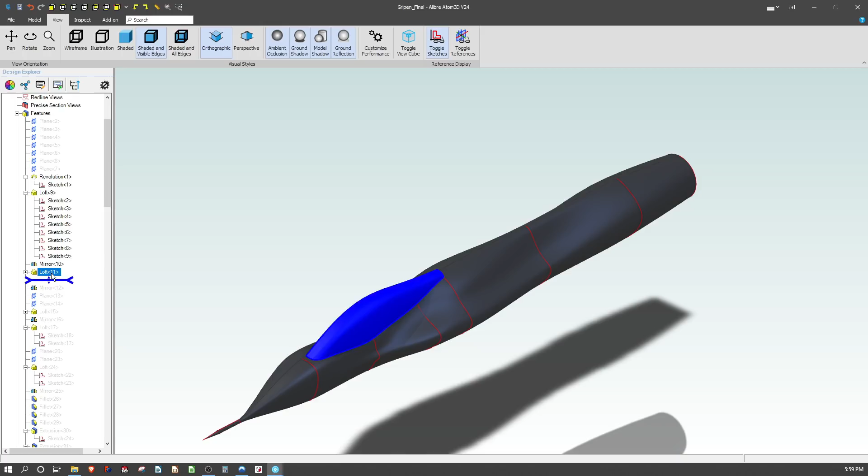And then I loft out the canopy, right? You can see from there, I have no canopy, and then I've lofted my canopy. And I just do a series of lofts on this plane along with other revolves and extrudes and other features, and it starts generating something that looks like a plane until I'm done.

So I lofted this intake here. You can see almost everything on this plane is just ways of doing lofts. So hopefully that's a reasonable illustration as to how useful lofting can be. And if you wonder, yeah, all these sketches are on planes. And so if I go to my view and I show the planes that I've made to make this, you can see all the different planes that have helped me loft from one place to another.

So lofting is so useful for making things that look realistic. And you don't need to know any of these skills other than what I've just showed you to make these lofts for this airplane body, which I think is super cool. So that is lofting. And that's probably the most complicated thing that we're going to go through in this video, mastering lofts. So hopefully that has taken something complex and made it relatively easy, which is kind of my overarching goal in all the videos that I make.

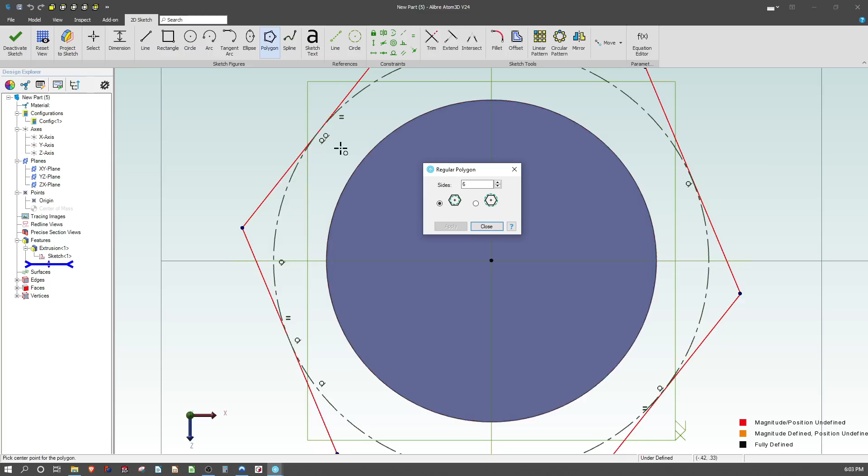We'll go close. We'll say horizontal. And I can give this a dimension, maybe 1, right? We'll deactivate, and we'll extrude again. And there's 0.5, right? So adding a dimension of 0.5 and just saying enter, we have a bolt. But what do we do about the bolt thread?

Well, let's choose our YZ plane here, create a sketch, and I'm going to sketch a triangle. And bolts are something like 60 degrees in their threads. So we give this a 60 degree. We're going to choose equal. And let's make all 3 of these lines equal. Actually, that's even over constraining it, so we don't have to worry about that.

Let's import. All right, project a sketch, this little bottom line here. We're going to maintain association and make it a reference figure. And that gives us a nice little landing point to land that bolt thread profile. We'll choose coincident and make it coincident to that little end line. And then I just have to give it a dimension.

So I'll choose my dimension tool up here. And we'll make this 0.125. Sweet. So I have a fully defined sketch. We're going to deactivate it. And now we're going to choose our helix feature right here. So I choose my little thread profile.

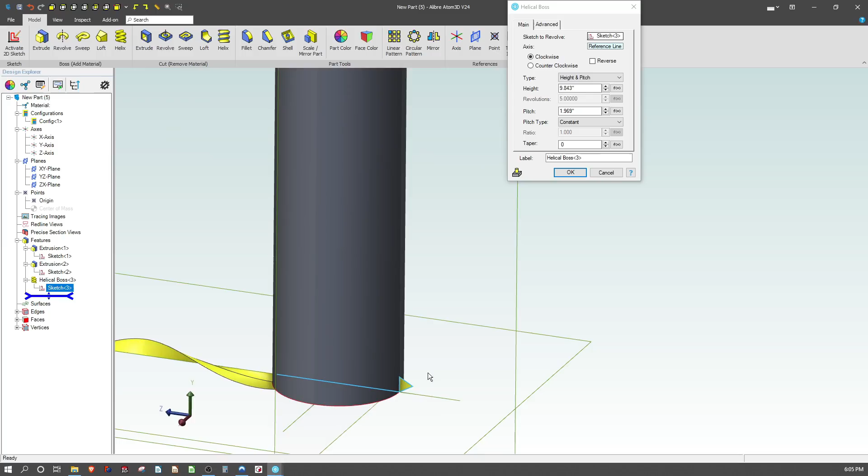And it asks, well, what is our axis that we should rotate around? And right now, Alibre thinks we're rotating around this axis, which makes this really cool looking little ribbon thing. I actually really like the way that looks. But we want to change it. So we'll choose our axis right here, which instead of reference line, we're going to choose our little vertical axis right here. Now you can see we're going straight up this bolt.

And there's a lot of ways to define how you want your helix. You can choose the height and the pitch, which is what we have right here. Right now we have a height of 1.96, or no, we have a height of 9.843. We can make that a height of 5 because our extrusion was a length of 5. And we can choose our pitch. There we go. You can see our height updates.

We can choose our pitch to be something like, I don't know, how many instances per inch? 10? Let's try 10. Nope. 0.1. There we go. That's looking kind of bolt-ish.

0.15. Something like that, right? That looks like a bolt. It's not standard thread dimensions, but I think it'll probably work. And we'll say OK.

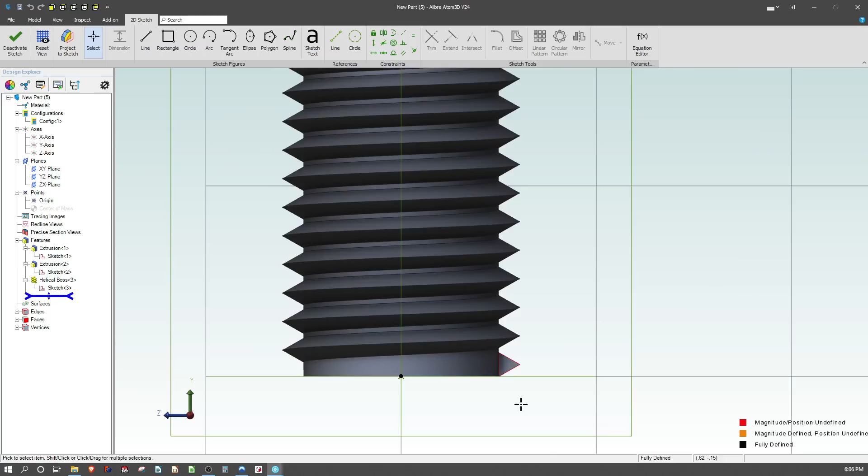And then if we really want that nice tapered thread that some bolts have at the beginning, right, I can go into my activated sketch. Now we've covered revolve so far, but we can also choose a revolved cut. In fact, let's import, right? So we'll choose project.

And how about I import that little vertical line, reference figure, maintained association, right? Like 95% of the time, I'm always choosing reference figure, maintained association. And now I've got that little line imported with those edges I can reference. And maybe I can choose a nice little taper.

It's not pretty yet. We're going to say horizontal. And I'm going to hit escape a few times. We're going to choose vertical here. That didn't work the way that I wanted it to, so I'll give this a dimension. 0.15, let's say. Ah, that's why it didn't work, because these lines are equal. So that's an auto constraint that came in. I just simply click on the equal constraint and I hit delete, and then those constraints go away.

I'm going to choose a vertical line here. And we'll give this a distance of something like 1. Ooh, that might be a little bit far reaching. We'll see. So what if I want to take this profile and revolve it around this axis, but remove material? We've done revolve where we've added material, but when we want to remove material, we choose this, right? We revolve where we cut away material.

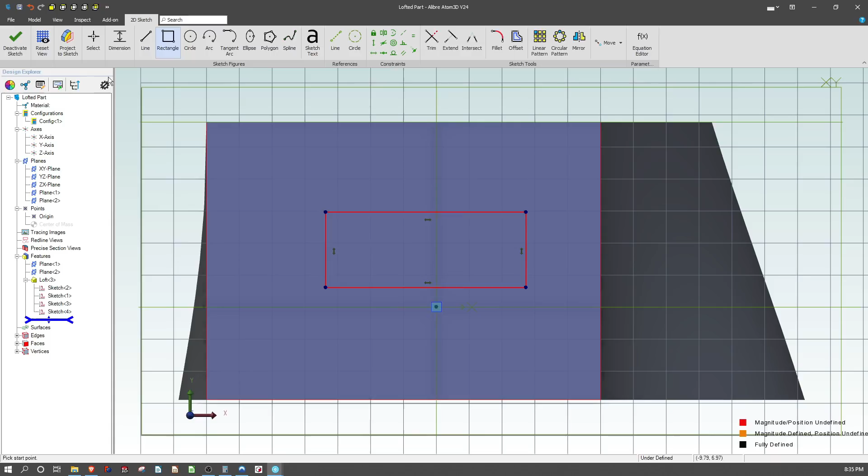So that's actually kind of a half-decent bolt. I'm impressed with what we've been able to do. So let's save that. So we've covered extrude, revolve, sweep, loft, and helix. And if I focus some more on loft, I can activate my sketch. I can make a rectangle. Again, best practice to fully define that, but in the interest of time, I'm going to leave it be, knowing that I'm breaking a best practice by not fully defining it.

I will make another rectangle here. Again, breaking a rule. If I make a subtractive loft, just to give you an idea of what it looks like when I use this, I choose one sketch and the other sketch, and there you can see we have a subtractive loft. I can specify my tangents and take them up to something dramatic like 10. You can see we have the exact same principles that apply.

Now, one of the difficulties is maybe you do need to look at an internal surface like this, and you're having trouble. We can go to Inspect and say Precise Section, and we can choose our plane here, our YZ plane, and apply. That allows us to cut the part to see internal features easier. So again, that's on the Inspect tab under Precise Section. Then you just click on the plane that you wish to section the model by. I can choose the central plane and choose Apply. And there we have views.

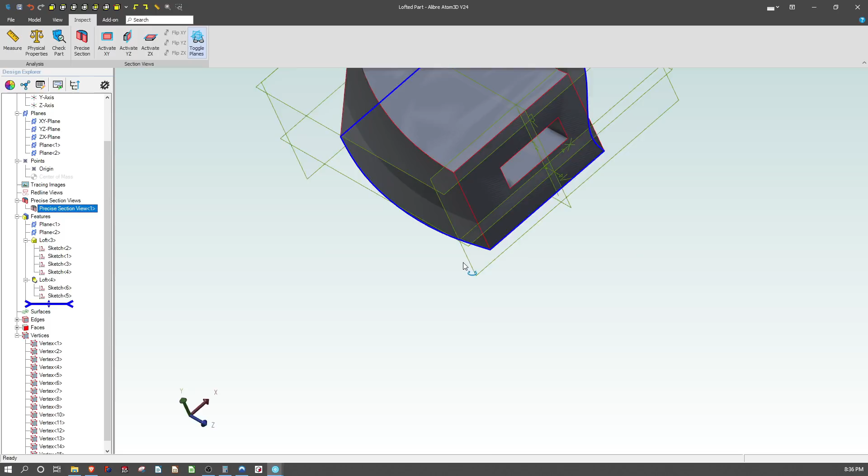And I can close. Now, in the tree here, I have Precise Section Views and Precise Section View 1 that I can toggle visibility on and off by right-clicking it. So that can be a very valuable tool should you need to use it. So we can do subtractive extrude, subtractive revolve, subtractive sweep, subtractive loft, subtractive helix. The subtractive features work in the exact same way that the additive features do. So I can save that.

And let's start a new part. Let's make something basic now. We're going to activate a 2D sketch. Let's create a rectangle. Again, many ways to define things. If I want the center of my rectangle to be here, I can use construction geometry. I can take two construction lines and make sure with the equal constraint that they are equal. And then I can use the parallel constraint and make sure that these are parallel.

And now the rectangle is centered on the origin. Likewise, since there's many ways to do the same thing in parametric CAD, I'll show one more. We can take the symmetric constraint, click our vertical plane here, and click 2 points to be kept symmetric. And now this is partially symmetric. I'll grab my symmetric constraint again, choose my horizontal plane, and choose these 2 vertical points. And now with the symmetric constraint, we are completely symmetric.

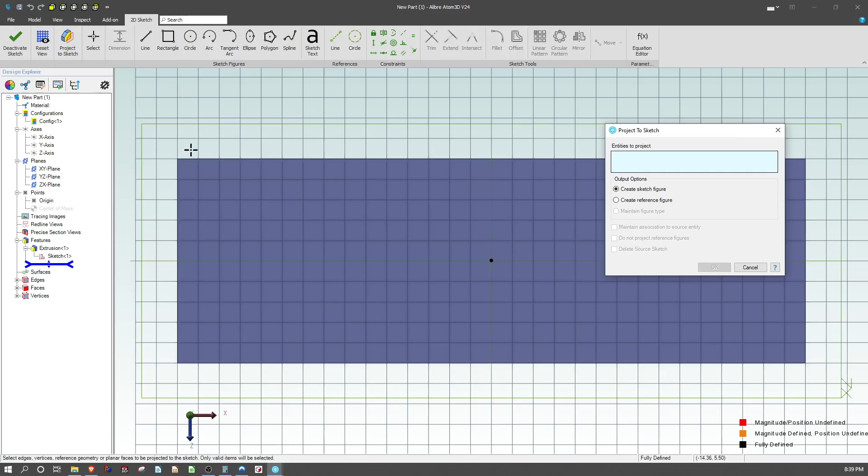Right, so that should be kind of a cool thing to go through. Let's make this, I don't know, 10 by 30. Interesting enough. We'll deactivate the sketch and do an extrude. And we'll extrude that 5 inches is great. Maybe on this face I'll create another sketch. And I'll make a rectangle. Notice I can't reference this outside, so we're going to project a sketch here, with maintained associations.

I'll make a rectangle. We'll go with dimension 4 by 1, right? Making this up as I go. We'll go to extrude, we'll go to 1. So we've extruded this by 1 inch. How about I sketch on this face over here? We'll activate a sketch. Go with a rectangle now. Let's import or project to sketch this line.

All right, we're going to go with the maintained association as a reference figure because I don't want that to be part of my geometry. We'll take a coincident constraint and attach it right to the end there. And give this a dimension of something like 1 by 1.5, right? And we'll deactivate a sketch.

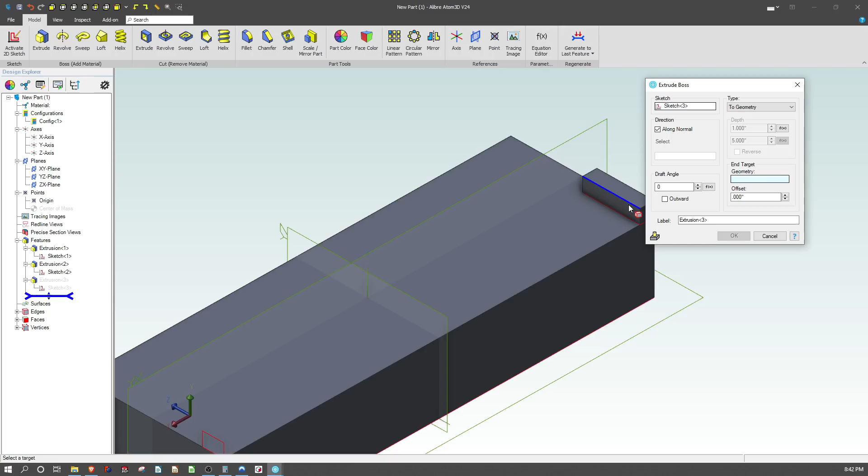So let's say I have an extrusion and I wish to extrude it up to this face. Well, it's kind of a lot of work to try to measure from here to here, and if there are model updates, extruding it a set distance is going to cause maintenance if I update the model. So Alibre has given us some tools that really help out with more advanced extrusions. If I go to this extrude, I don't just have to specify a dimension to a certain depth. I can change this to something like to geometry. And then it asks me what the geometry is. I can select this face. And I say OK. And we are merged completely.

So it's very useful because if I come back into my original sketch and I make this 15, something a lot shorter, and I again generate to my last feature here, then this is already ending at this face, right? If I told this to go 30 or however long I wanted it to go, and then I changed the dimension of that sketch, this extrusion would be coming way out here and it wouldn't be updating properly. That's a huge advantage, right?

Some other tools, I can activate a sketch on here and I can make a rectangle and I can try to make it coincident, right? So I choose the coincident and I can choose this line and this point. You'll notice when I have a coincident and I choose an edge, it can import it for me to try to save a little bit of time. I can make this 4. How about by 0.5? How about by 1? And I'll deactivate the sketch.

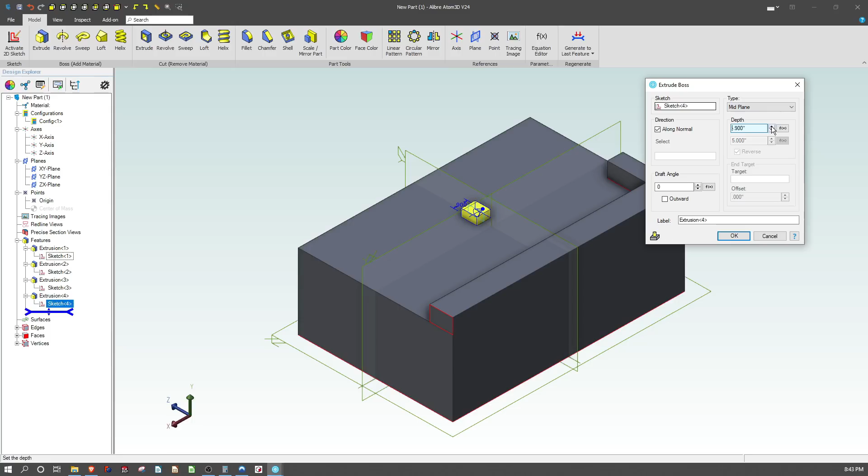So another interesting thing that I can do is click on extrude and we can say to mid plane. And you can even drag the arrow in the graphics display window, now it's symmetric to the plane that I'm extruding out of. That's really important because often we make things in CAD that we want to be symmetrical. And that is super easy because now it keeps a plane that I can mirror future features across. So if I put a hole on one side now, I can use the plane that I extruded mid-plane from as the mirror plane to mirror that hole, and so on and so forth. So mid-plane is a great tool to be able to use.

To next will automatically try to take it to the next geometry that this will naturally run into. So I would have to drag my sketch a little bit, right? Let's go back in the tree, edit our sketch. Maybe I'll make this 0.5, deactivate the sketch, extrude, and if I say to next, there's still nothing for it to run into, so I'll hit reverse, and then it automatically just goes to the next geometry that it finds. Very, very useful. So those are some extrude tools that are very useful in coming to work with this.

Finally, dual depth is also pretty cool. I can specify different dimensions on one side to the other. So I can say, make this 1.4 inches in one direction and 5.1 inches in the other direction, right? So that is to next. The same rules are for subtractive, right? So I can do a subtractive extrude with symmetry and up to next and so on.

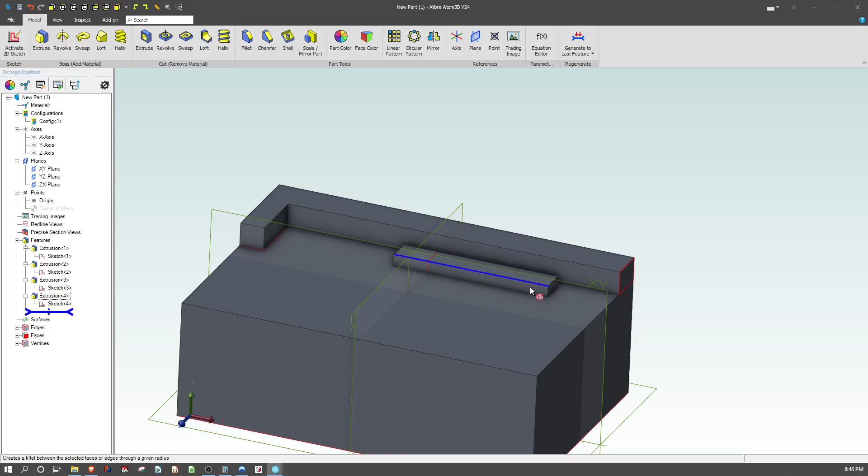So this is our model so far, and there are now some direct type editing features that I can do. The first one is fillets. I really think fillets are very important. So if I click on this fillet button, a fillet means a rounded edge. You can see here we're defaulting to 1/2 inch, which is good for our model size. So if I select an edge, you can see it automatically rounds that edge off. And I can continue selecting edges all the way around.

Now, I can select a face, and that will fillet every edge on that face, like up here, right? You can see the fillets that we are adding. Very, very useful. So those will round edges.

Now there's a really cool feature that if I don't want a constant radius that I'm rounding with, I can change this from constant to variable radius, and now I have 2 radius inputs. So I can select an edge and make my second one say 1 inch, and we taper from 1 inch to 0.5 inches. And so I can use variable sized radiuses.

The next cool thing would be chamfers, right? Chamfer is what you think of as an angled or beveled edge. You can see that we just have a straight line at 45 degrees. And there are several different types. So I can adjust my sizing here, right? I can make it quite large at 0.5.

I can go back and edit my chamfer and choose something like distance, distance. And that will make it 0.5 in one direction and 0.25 in the other, which is a very common way that engineers dimension these chamfers. 0.125, right? And you can also flip the dimension here. So very, very common way to do chamfers. And then equal distance, right? Covered that. Angle distance is the last one.

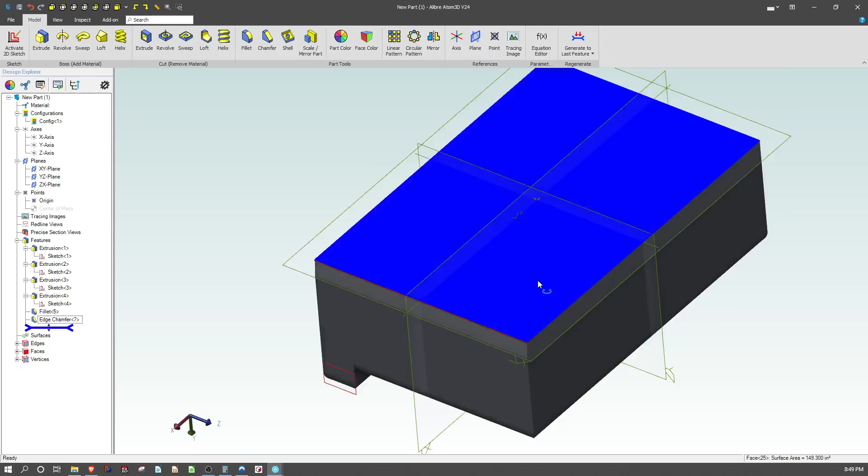The next thing that we would want to go through is shell. And shell is a fun one. Let's say that I want to get rid of my fillet here. So I'm going to delete my fillet to clean things up a little bit. Let's say I want this part to be hollow. I want this whole face to be hollow and everything here to have a set thickness. Well, I can do that, right? So I have my face highlighted. I'll come up here to shell, and that shells it hollow at a set thickness.

And this menu comes up when you go to shell it, and so I can say that my standard thickness can change. And then I can also change this to shell outward if I wish, to say that these outer faces are actually the inward faces of my part now. So I have many options on how to shell.

And then I can choose overrides, right? So if I wish, I'll shell inward here, and I'll say I want it to be thicker on this face. Whoops, that went to the wrong one though. So I'm going to remove selected item, come over here, add this face in. You'll notice this pocket under here as I change this thickness.

You can see that I made that very thin, and there we have a very, very thin thickness as compared to the rest, 0.005. So that's how you can make, you know, different thicknesses when you shell something based on what faces that you have.

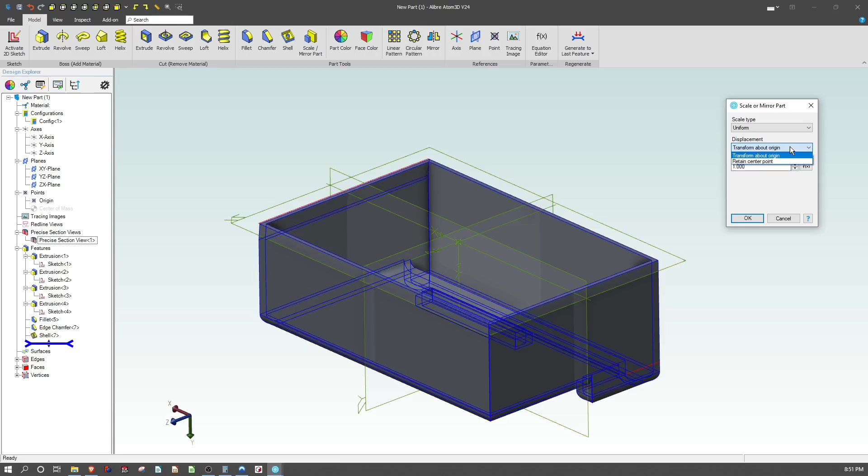All right, so we have covered fillet, chamfer, shell, and then we have scale and mirror part, which is actually pretty cool. So we have different types of scales and we have different displacements. So we'll transform about the origin with a uniform scale, and if I type in 2, I make this twice as big, right? So I can scale the part anytime I want, and I can continue to add features after the scale, which is totally great. So that's a uniform scale.

Now, if I go to my scale and edit that, I can change the uniform to non-uniform, and there you can see I'm scaling it 2 times, but only in one direction, in the x direction. I can scale my factor of y, say by 3 in the y direction. And if I leave my factor of z in 1, then you can see that I leave my z dimensions the same. But things can be scaled non-uniformly, which is super cool, right?

So I have that scaling feature. And then if I edit that, I can choose mirror. And I don't really have a very convenient plane to mirror across. But if I mirror across the XY plane, then you can see that I change the way that the part is mirrored. So I can roll my history tree back down to prior to the scale, and then I can roll it forward

to remirror it. So I don't know if I've talked enough about the history tree, so I'm going to go through that. Right. So I have this bar right here, and what I can do is I can say, well, my first thing I did was an extrusion, which meant making a sketch to generate the extrusion. Then I made another extrusion to make this part. Then I made another extrusion. Then I made another extrusion. Then I did fillet. I did an edge chamfer.

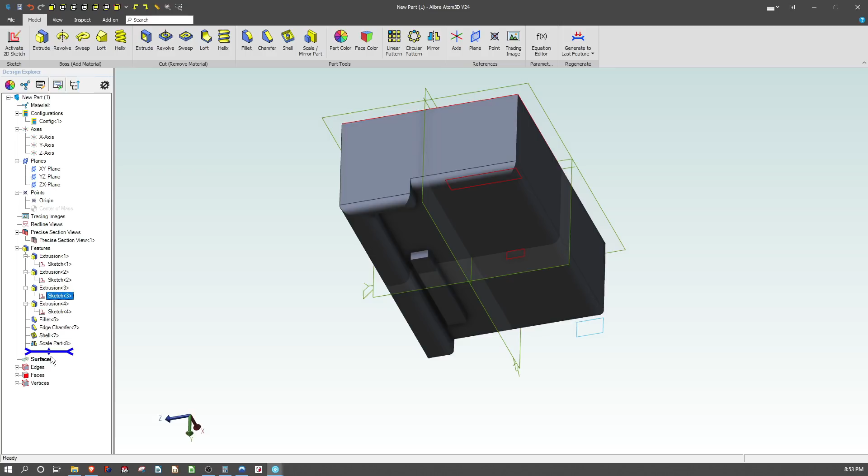And I can take this bar and roll all the way back. That's to my first extrusion. Right, that was my first extrusion. And then I can roll it forward one and see that that was my next extrusion. Then I can roll it forward by one and see that was my next extrusion, right? So this is the history of how the part was made.

And you can roll it back, like going back in time, and roll it forward again to see the features that you've made. Very, very useful, right? That's what makes it parametric CAD. This would not be parametric if it wasn't for this history tree. So, we covered the history tree. We've covered all these kind of direct editing features.

If I wish to change the color of my part, right? Sometimes, and you may think, well, what's the engineering application of changing the color of a part? If I'm an engineer and this is just for manufacturing, why do I care what the color is? And one cool thing you can do is if you have obsolete revisions that you don't want to be mistaken for current production parts, you can make your obsolete parts this sort of terrible, awful, no good pink color, like Pepto-Bismol-ish, unpleasant color that nobody's gonna mistake for a production part. Super, super useful if you ask me, to be able to change the color.

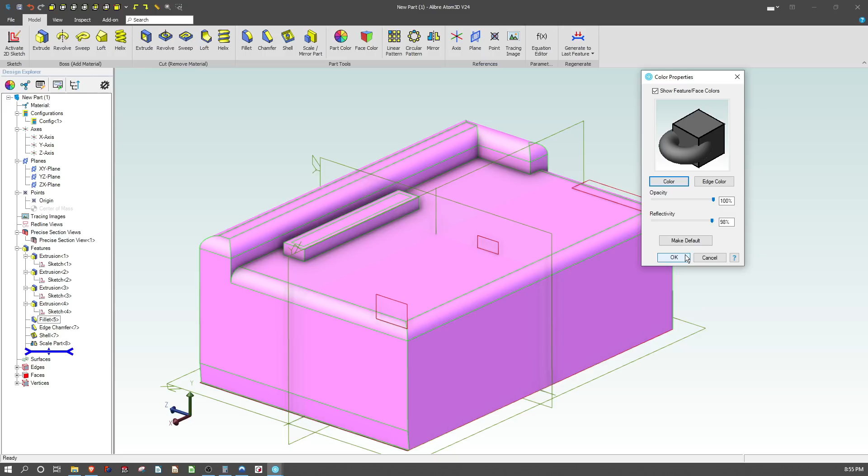But there's a few other things that you can do, right? You can change the color of edges. If for some reason you think it would look good with, oh, how about green edges? That's even more terrible to look at. But you can customize your part color and your edge color. Get that pink away from me. Ugh. Maybe I want a darker color, right? So I say OK. And notice I have opacity and reflectivity settings. And I can adjust those.

So I go to my part color. I set my reflectivity to go from 98 to 100%. You can see how much reflectivity that changes. So we can play around with different opacity and reflectivity settings. Right? Opacity, of course, you could call that transparency as well. So you can kind of see through the part if you turn your opacity down, as you're seeing here.

And as you change your reflectivity, you can kind of see in the preview what that does. So that's pretty cool, right? There's our opacity and reflectivity settings, and then we can change the color of individual faces. So if I open up my face color, this menu pops up and I can make this face, say, green because that's actually my favorite color. And I have this pleasant green and black looking thing. So it can help you customize your appearance.

And I know that Gripen that I modeled, all this is just different face colors, and it really adds a lot. You know, if I roll this back to before I assign the colors, then you can see it looks a lot more plain and a lot less exciting. So I really like the idea of using face colors, and I think it's quite useful.

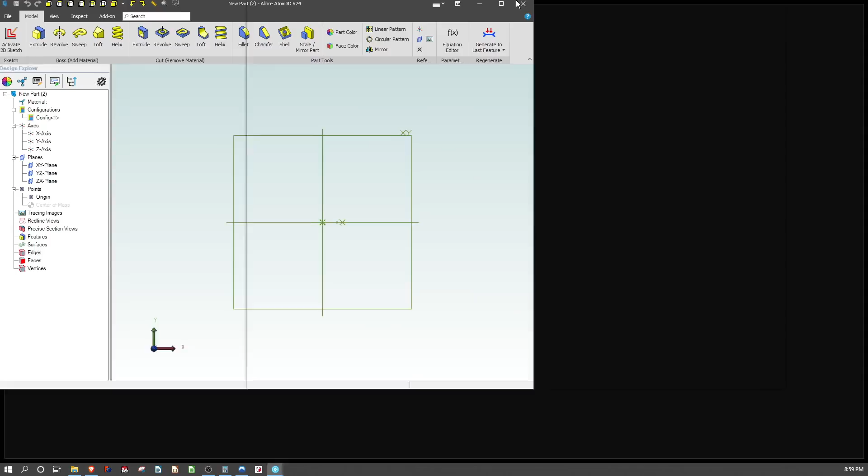All right, linear patterns. Let's save this, and let's start a new part. On this one, we'll choose this here. Activate a 2D sketch. We'll choose a rectangle. I think I already showed how to center rectangles, so I'll simply use a quick method, collinear with my construction lines, and equal, right? This should be familiar because I think I just did it. And then I'll grab a dimension here and make it, I don't know, 6 by 4. Good little aspect ratio there.

Let's deactivate the sketch, extrude, and we can make that 1 or something. Select one of these faces up here. We'll create a sketch, and I'm going to choose a circle.

From this edge, we'll make it 0.25. Likewise, 0.25. And we'll give this a diameter, let's say 0.35. We'll deactivate the sketch. We'll choose Cut Extrude. And I'll choose Through All. I guess I didn't cover that, but that means that you go through absolutely everything, the whole model.

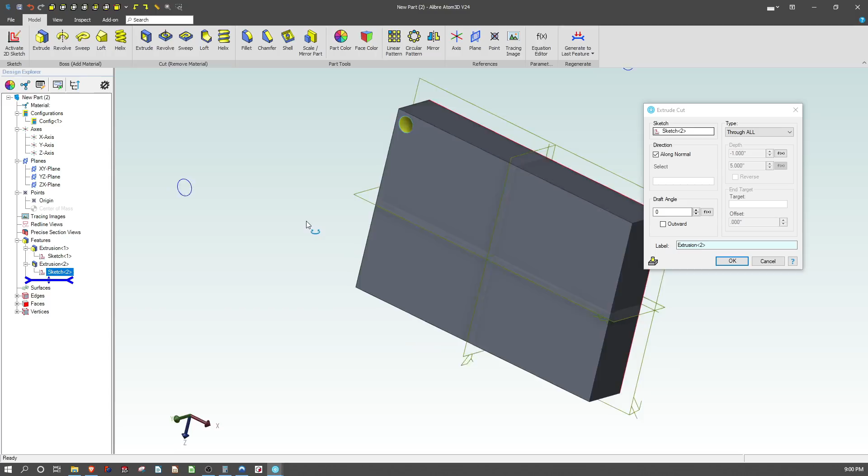Next, let's say I want to make a whole bunch of holes. Sketching all of those out is not very ideal. That will take forever. So we have some patterning tools that will help us out. We'll go to Linear Pattern, and when I choose Linear Pattern, this menu comes up. And it asks me what features I want to pattern.

Now I can choose the hole that I'm wanting to pattern, and I can choose my linear path, let's say in the direction of this edge. I can also choose in the direction of a plane. Well, maybe not. We'll just do the edge. And then I can choose spacing. Let's say every ½ inch, I want to have an instance of another hole. And then I can choose how many instances I want. And the more that I click up for the number of instances, the more holes appear, right?

Now I can also choose in a second direction a linear path, say in the direction of this edge. And I can choose a spacing of 0.5 again. And I can up the number of instances that I have. Now they're not showing up, so I'll choose Change Direction. And now we're going in the direction where we'll intersect the model. And I can make an array of holes.

One thing about patterns is that they are very heavy. And the more you pattern and the more instances that you place, the heavier, and I mean computationally heavy, the model becomes. So use patterns sparingly if you can. Okay. So there we have ways that we can do linear patterns, right? We can pattern them down linear directions, and we can do 2 directions at once, and it makes this kind of cool. Great. Maybe I'll save that.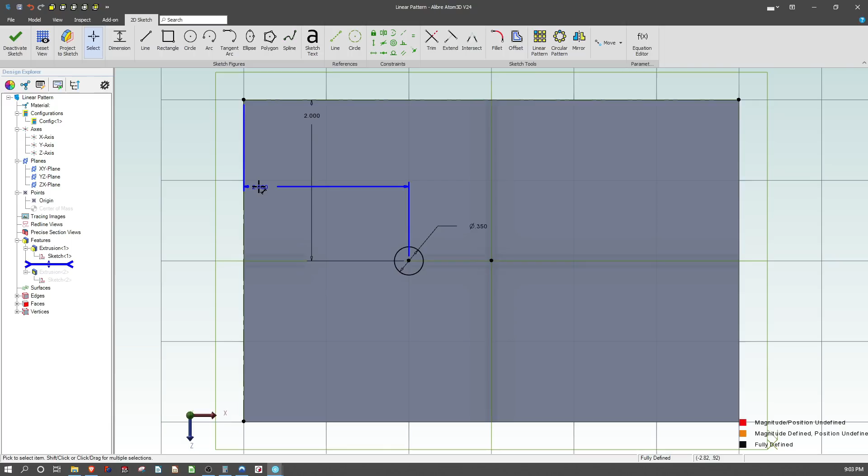And then if I delete my feature pattern, right, delete that, and I'll delete my extrusion. Or in fact, you know what, I'll edit my sketch instead. Let's make this something like 3. How about 2, actually? And I'll make this something like 2 as well, a little bit closer to the center. Deactivate my sketch now. What if I want to make a pattern of holes that go in a circle around my center axis? For that, I can choose Circular Pattern.

This is my circular pattern menu that comes up. And I'll choose this as a feature to pattern. And I'll go to my center, and I'll choose the axis running through the middle of my part. And then if I change my instances, watch what happens here. Nothing seems to happen as I up my instances. And that is because I am constraining this to say I want an instance every 90 degrees. If I said I want an instance every 5 degrees of rotation, you can see I'm almost making kind of an awkward slot shape because my degrees are so low.

But I can up my degrees, and you can start to see how this works. We go every 25 degrees there's a new instance. But what if I just want to have it be equal spaced? I'll choose 360 degrees. And I'll choose this option here, which is to say the more instances that I add, the more they will be distributed through the degree angle that I specify. So in this case I have 15, and go 16, 17 holes all around this circle. And I can say OK to that.

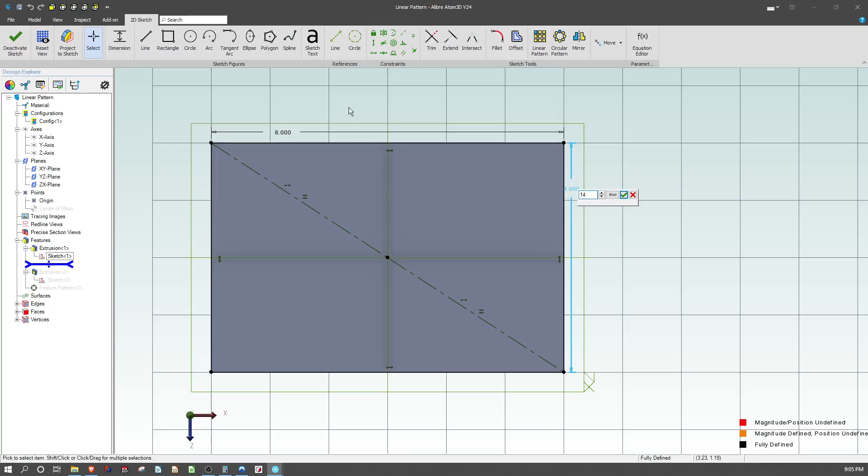I can make a plane if I wish, and my plane, in fact, allow me to edit my sketch. I'll edit my very first sketch here on extrusion 1, and we'll make this something like 14. And let's go with 100, right? Something big. We'll deactivate the sketch. And notice my tree goes back to where I've been editing. So I can either drag the tree back down to regenerate the features that I've made, which of course come down here.

So if you're wondering how we got here, right? Record scratch, that's me. I bet you're wondering how I got in this situation.

What we've done is we've said we're going to make a hole pattern from this hole, which was defined from this face and this face. So we've got a hole right here, but we're still trying to pattern it around this center axis. And so the pattern is going whew, all the way around, and it's very, very, very big. So we just have to run a simple update.

And this goes back to design intent, right? I should have dimensioned this hole closer to my axis, because then as I updated the model, it would have updated in a predictable way. So let me take this dimension, delete it. We'll take this dimension, delete it. I'll take a new dimension, and I'll make this horizontally, say 2 inches away from my axis here. And maybe I'll take a horizontal constraint and make this hole be horizontal.

And then if I deactivate my sketch and generate to my last feature, you can see that brings back our hole pattern. So when you're doing parametric CAD, that's very, very common, where when things update, you just have to run through the tree and figure out why something didn't update in a predictable fashion. In this case, I dimensioned the edges instead of around the center axis.

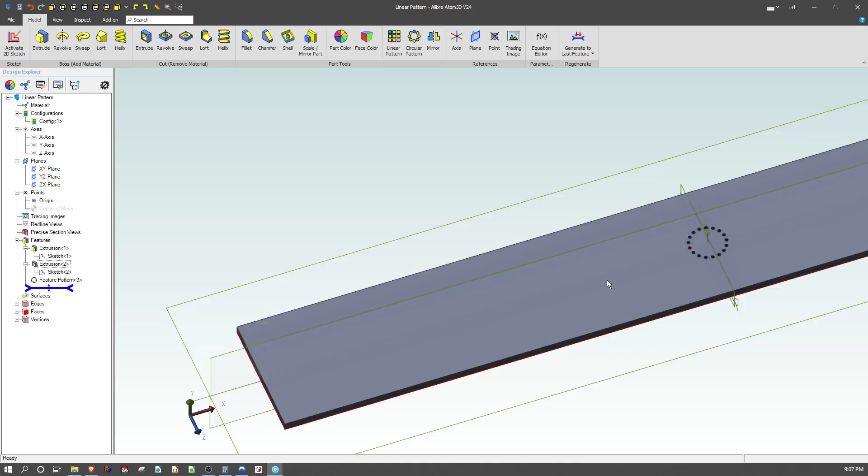All right, so if I get to the meat of the thing, I could do a linear pattern, and I can select my feature pattern and my original hole, and I'll choose this linear pattern to be in this direction. And you can see patterns are heavy, so we're thinking about this already. Oh, that looks really cool. Depending on your system performance, you may have had a hard time regenerating. Just let it sit and do its thing, and it will happen.

So I can make this be spaced out every 5 inches, or every half an inch. Let's go every 5 inches and update that. Again, we have to stop and think about this. And so we can pattern our patterns doing this, which is super cool. So I say OK to that, but why stop there? What if I want the other side to be patterned? I can model, and then I can choose this mirror feature, right?

So when I go to mirror something, I think I mentioned mirroring earlier. I can take everything that I've created so far simply by clicking on it, and I want to mirror it, say, across this plane. And it's a lot like the symmetry constraint that we've been working on. Now, I just created a heavy pattern over here, so it'll take a minute to generate the pattern on this side. There it goes. I can say OK to that, and you can tell by mirroring it, I've put a hole in between every other hole from mirroring this around the center.

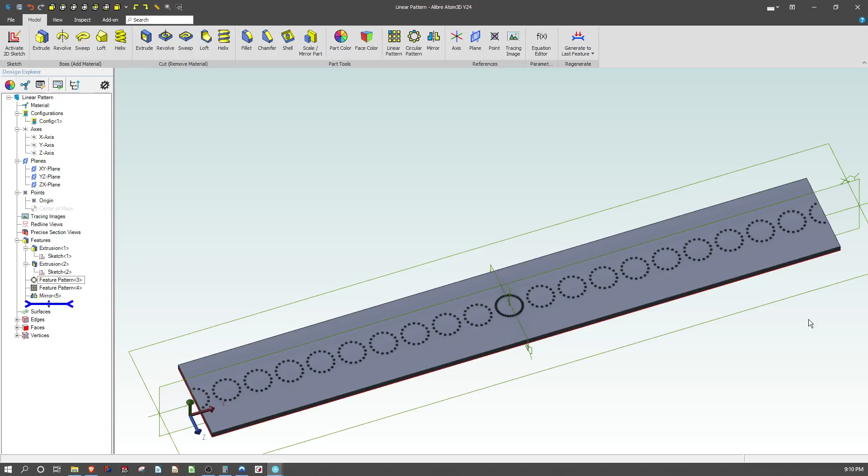So I have a tutorial on making a JAS-39 fighter jet. I think it's one of the coolest fighter jets out there. And I used a picture to help me model that. And so you can import pictures if you wish. You can check out my JAS-39 series if you wish to model from pictures in greater depth. Here, I'll just show you how to import an image.

So let's start a new part. I can save this. And here's our new part. I can choose my tracing image. And my plane, I'll just choose this as a plane, and I can browse through the Explorer for my image here. And there, my image is imported. I can also choose my scaling, right? I can make this say twice as big, but of course it only goes twice as big in one direction.

So I can edit my tracing image from my tree here, and I can put a 2 on my Y scale as well. And I can twist this at an angle if I need. I can also edit the position with my X and my Y offsets. Importantly, I can calibrate my size. Let's say from center to center of my wings.

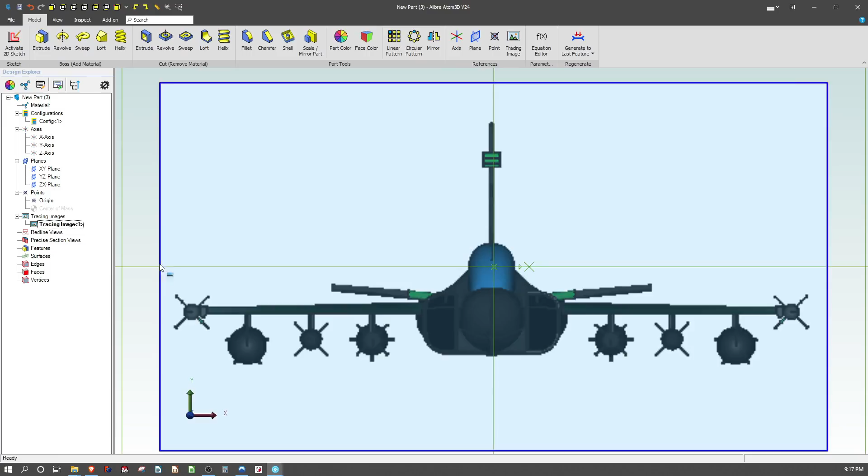So there we have a sketch picture. We have some datum geometry as well, and I think we've gone through some of it. Let me close this, and I'll reopen this guy here. So I've shown you how to make planes, and I can continue with that, right? So if I want to make a plane, I can choose 3 points to make a plane off of my solid here, and there's a plane, so I can sketch on that plane or do whatever I need if I need some additional reference geometry.

Or I can choose this edge and 1 point, and the plane will spin around this edge and intersect through this point to fully define it. So I can make a plane that way. Or I could choose this curvy edge, and I can just make a plane that is constrained at the end of the edge, and I can choose the other end. And what I'm doing is I'm saying I want the plane to be normal to my edge, or I want whatever curve is on my edge to be piercing straight into the plane as it's constrained.

So this edge ends on being completely vertical, so the plane is exactly horizontal because this ends on being exactly vertical. And if I go to the other end, you can see the normal that this edge ends on. So we can make it on the end of edges, which I think is super convenient. And you can go along a sketch with the plane as well.

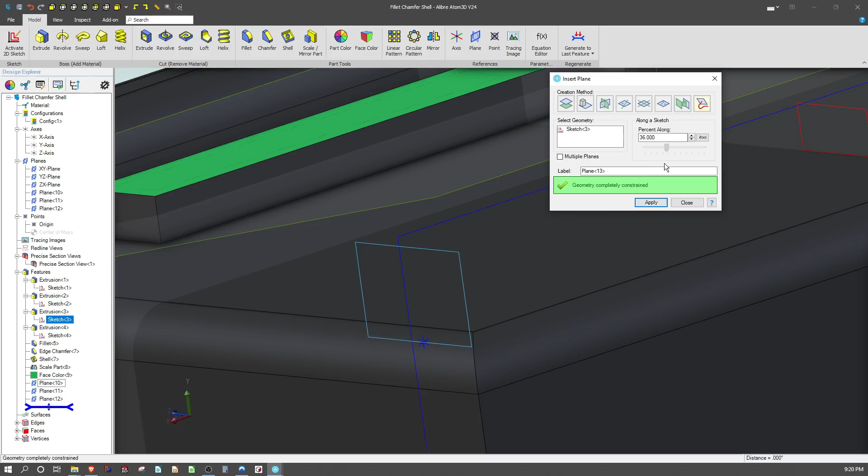If I choose a closed sketch, and I choose along a sketch, I can choose the percentage that I want my plane to be along it. This isn't that great of an example because it's so hard to visualize, but Alibre is doing this in a good way. So if I close this, and I sketch on this face, and I create a spline that's just kind of a crazy shape, and I deactivate my sketch, and I grab my sketch and my plane and I progress my plane, you can tell that the plane stays normal to any point of the sketch, from 0 to 100%. So I can do a plane definition anywhere on a sketch, which is super useful.

We've done 3 points, which I've shown. And here if I create this plane, I've got a tangent slope, which is pretty cool. So if I have a curvy face like this, and I create a plane, I choose this plane that we're going to be tangent to, and I have so many planes on here it's getting confusing. So I can make the plane tangent to this edge, and then I choose a reference over here, and you can see that the plane is parallel to the plane that I've chosen as a reference, and tangent to the curvy edge that I made.

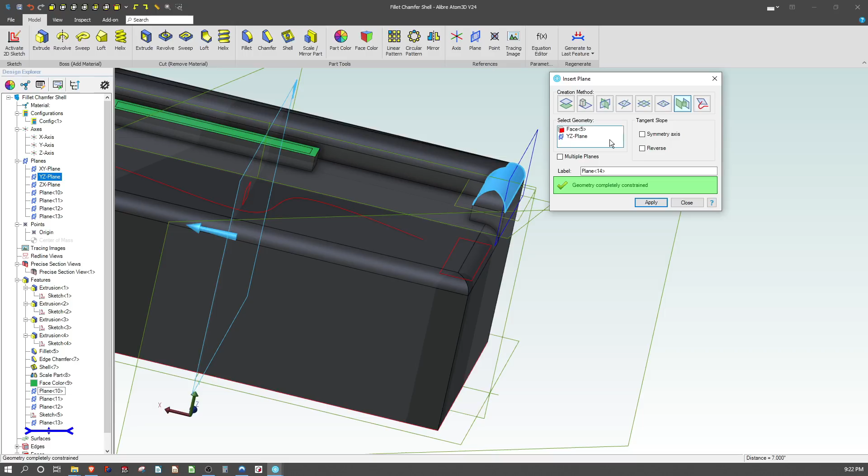I can reverse this if I wish for it to go to the other side, or I can delete my plane reference, and I can say, oh, you know what, I want you to be parallel to maybe this plane, and then it's parallel to that plane, and I can reverse that plane up and down. So those are all the ways that you can generate planes. And fear not, because all these planes, of course, are in the history tree parametrically that you can adjust as time goes on.

In some people's workflows, they create planes for every single sketch that they make. And the benefit of that is you can adjust the position of any sketch at any time. So it can be a reasonable habit to get into, and it especially works in Alibre. In some platforms, that is even a best practice. I don't know if making a plane for every sketch you make is the best practice in Alibre or not, but I think it carries some benefit either way.

So I'll save this. So on the model menu, I have covered just about everything except this equation editor. This is new, or I should say this has been updated since the older version that I've been using. So I'm not brilliantly familiar with equations yet. I'm just familiar with the old way that Alibre has done them. So I'm going to hold off on covering this until I get a chance to really practice it.

Other than that, we can change this to regenerate everything, and that just regenerates the whole model from start to end, versus you can say generate to last feature, which there's not a lot here, so it generates really quick. But again, I can skip down here and say generate to last feature, and it regenerates everything. I can come down here and say regenerate all, and it regenerates everything. So there's similar functions. This just generates everything from the beginning, whereas the other one just regenerates from where the bar is, the only difference. So

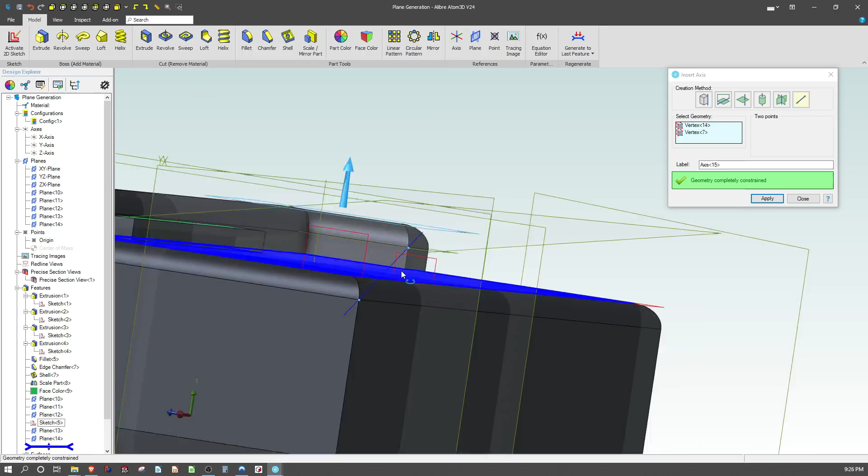Great. We've covered sketching, we've covered extrude, revolve, sweep, loft, helix, fillet, chamfer, shell, scale, mirror, colors, patterns. Maybe I want to make an axis. And just like in planes, this should feel very familiar. I can make an axis from one point to another, which is, of course, in Alibre called vertexes. I choose 2 vertexes. That gives me an axis running through the part, right? That's an easy way to generate something that you want to make a polar pattern around.

I can choose an axis around a curved face, right? So now I have an axis that runs through the center of my curved face up there. I can make an axis from 2 planes that intersect. So I have this plane intersecting with this plane, and then I have an axis that goes through where those planes intersect, right? Easy. So there's 2 points, intersection, curved face, plane face normal, and point vertex.

So I can make this face, and I have to actually highlight this to be able to select a point. That threw me for a second. Then I've created an axis normal to this face at this point that I've selected, right? Easy. And then I can just choose a straight up model edge, right? So I can choose this edge, and it turns that edge into an axis. So that's how you make axes.

And now you can make just datum points. And you can define points just by where things intersect, like how our origin is, where 3 planes intersect, and so on. Now, I have not used points, and they haven't been too needful for me to use at all up until this point, but you can make them through similar means as axis and plane.

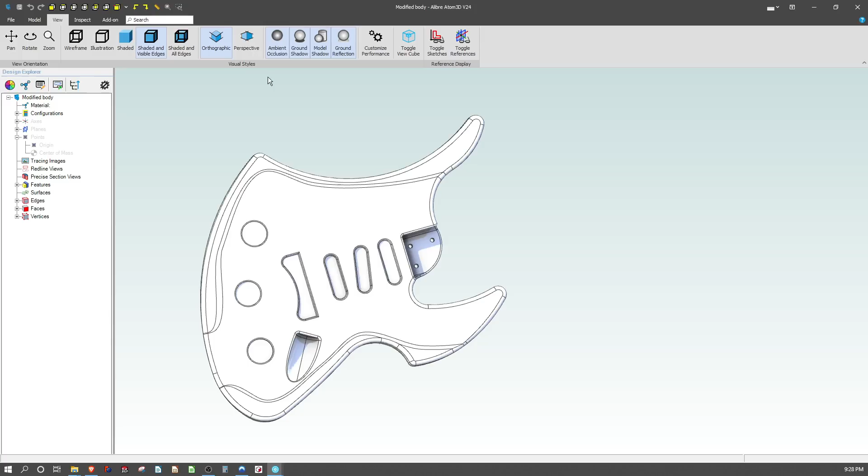If this is too boring of a color, I can change my color to some, I don't know, cool electric guitar color. We're going to say OK. Kablam, right? That's kind of a cool, energetic color that you'd want to do a guitar solo with. Let's now say File, and make a new assembly here. And this opens up the assembly environment, which is a little bit different than the part environment. It may ask you to import parts immediately. If it doesn't, or if you need to add parts after the fact, just say Insert Design right here.

And I'll take my guitar body, and you'll see I've got a little menu right here that says Inserting. Each mouse click will add another copy, so I can just keep on clicking my mouse and add as many guitars as I wish. That's pretty busy, so I'm going to say Finish. And of course, if I'm assembling a guitar, I only need one, so I can select my tree. I can hold Control and select all my bodies and say Delete.

So this is free to move around. My first thing I like to do is right-click and simply say Anchor Part, and that means that I've got at least one part in my assembly that is fixed in place and won't float around. You really need that. I can say Insert Design,

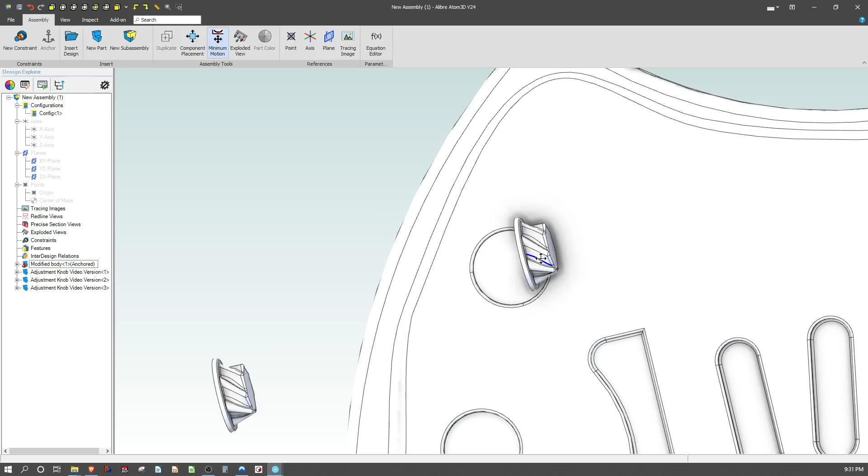So I'll add my adjustment knobs now. Now, of course, this is turned and weird, and I just want this to fit where the knobs go. So if I highlight this face and I highlight New Constraint, right? We use constraints a lot like how we use sketch constraints, and we can make these things related. So I want this face and this highlighted face here to be what we call coincident, or resting on each other. But as you can see, this became coincident in the wrong direction.

So first off, this defaults to coincident, and I can flip this part around and apply. And there you can see, no matter what I do, this knob is always going to be coincident to that face. But I want this knob to be in the middle of the circle here. Well, fortunately, I have a circular face in here.

So I choose my circular face, I'll choose New Constraint, and I'll add in my other circular face, and we default to being concentric, or coaxial I should say, where they share the same axis that runs through the circles. So I can apply that, and now I have a knob that twists just right. 1 degree of freedom, we would say.

We can do the same. Right click here and here. I can flip this around. I can apply, and then I'll choose my circular face. And I'll choose my next circular face, and our knob is positioned. And a final time, we'll reverse, we'll apply, circular face, circular face.

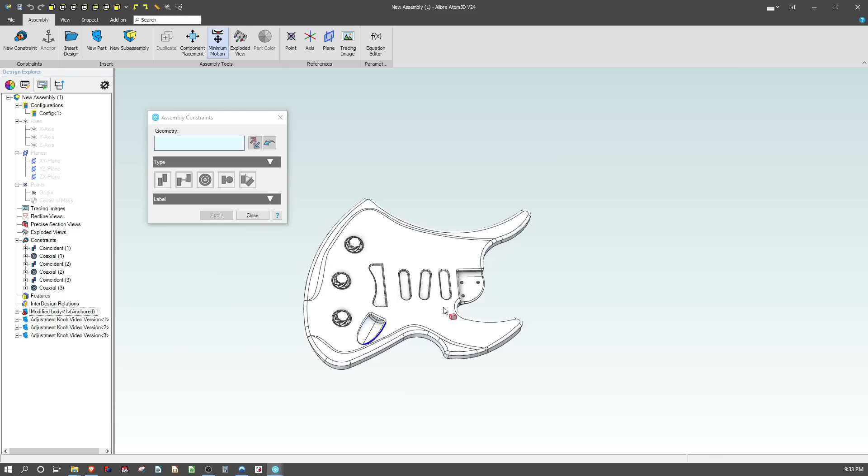So those are some decent ways to get started. What else can we do? Well, how about I import my guitar neck? I'll insert design, and insert my neck detail and finish. So the first thing, I know that I want to add a new constraint and flip this thing around, right? This face and this face are going to be coincident. We flip it upside down. There we go.

Next, what if I want things to be a certain distance apart? Well, I can select this back face, and I can select this face over here, and I can change this to be offset. And I can make my offset something like 10 inches. And apply that, and now no matter how I manipulate this, those faces will always be 10 inches apart. Now if I want to change that again, of course, I can view my list of constraints here, and I can find my offset constraint, and I can edit that.

Likewise, I have all my parts here, like my guitar body, my adjustment knob, and so if there's a lot of constraints in a very long list, I can come down here to my neck detail, and I can choose my constraints down here, and then I just have the filtered constraints for my neck and not for any other components. So it's an easier way to find your constraints. In fact, I recommend using that way to find constraints because this list gets pretty long pretty fast.

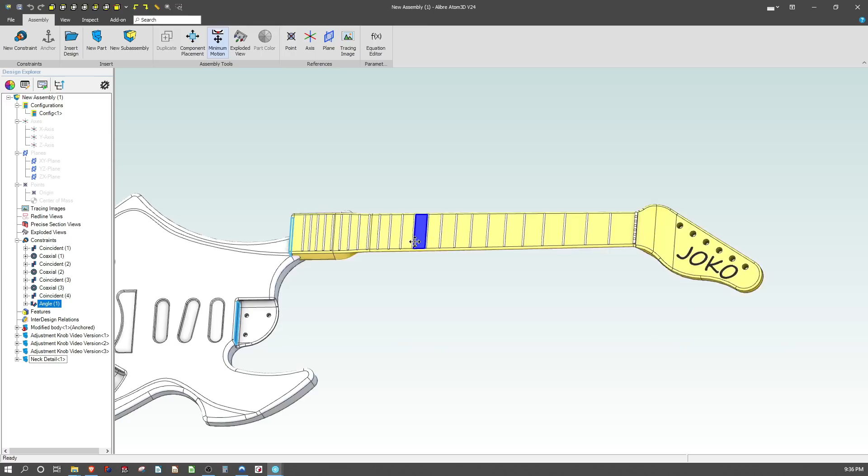But what if I want these faces to be parallel? Well, there's no parallel constraint, so Alibre can't do it. End of story. Just kidding. I set my angle, and notice it will hold whatever angle I wish, 45 degrees even. So all I actually have to do for my angle is set this to 0 degrees, or in our case, 180 degrees, and say OK. And now it makes sure that they're parallel, but I can still have any distance that I wish and constrain it in other ways, should I want to do so.

Now, I know that I have a bolt hole right here, and the bolt should thread into this hole. So can I constrain those? I'll add a new constraint, add my hole, and of course we have an angle between these, which isn't what we want. So I'll change this back to coaxial, and again our coaxial constraint delivers. So I can apply that, and you'll see that no matter how I manipulate my neck, we are now fully constrained. And I built my guitar. So those are the fundamental constraints that I like to use.